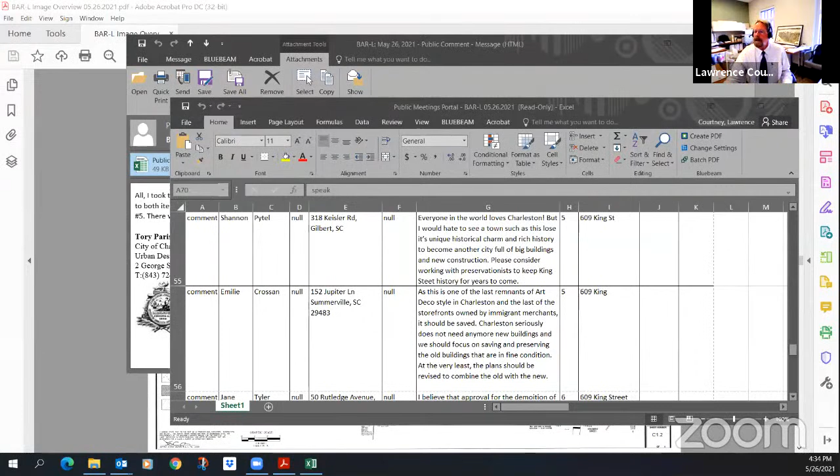Welcome to the May 26, 2021 BAR Large Virtual Meeting. My name is John Robinson. The other board members present, or that will be present this afternoon, are Jay White, Luda Sobchuk, Leon Scott, and James Metters to join us shortly. City staff present today are Tory Parish, Lawrence Courtney, and Linda Bennett.

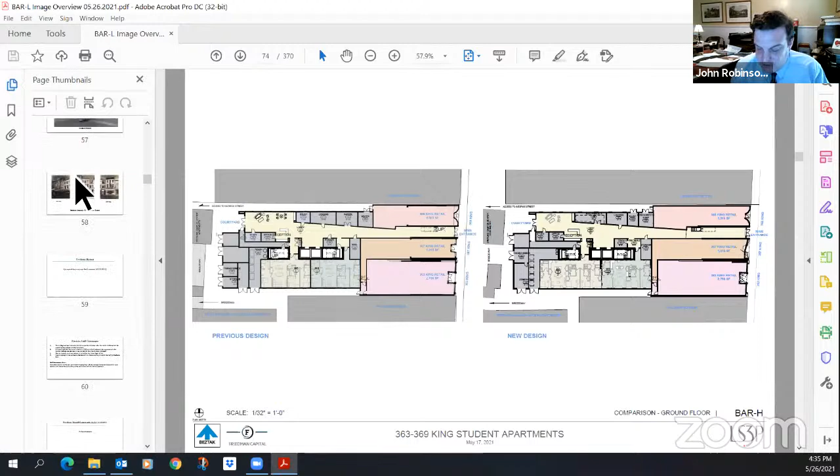The order of the meeting will be as follows. We will have an introduction and overview of the project by city staff to the board and the public. There will then be a period for applicant presentation, a 10-minute time limit as determined by the chair, and any questions of the applicant by the board or staff. Any and all presenters should clearly state their name for the record. Persons affiliated with the project, be they owners, developers, designers, consultants, or other affiliated persons, should speak during this portion rather than during public comment.

There will then be a period of public comment. Public comment is a 10-minute time limit or its equivalent to the applicant presentation as determined by the chair. The applicant does not respond to comments made during public comment. Please, if you are a member of the public, please clearly state your name for the record.

There will then follow a period of city staff comments and recommendations. This is in turn followed by applicant responses or clarifications to the public comment and city staff comments and recommendations. The 5-minute rule applies to this portion as well. The applicant will then take a seat and will speak only if called upon by board or staff.

This is followed finally by the board discussion and vote. The applicant presentation and the public comment are at this point closed. The applicant may clarify inaccurate information when recognized by the chair by raising their hand and waiting to be called upon. Otherwise, they may only speak if they are asked a question by a board member.

There are no items this evening that have been withdrawn or deferred, which means we have 6 agenda items for this busy evening. This is a reminder to the public, if you are able, please turn off all cell phones and other devices. Please also be advised that the BAR's purview and jurisdiction is limited. Please therefore limit your comments to architecture only. Comments related to zoning, such as parking, traffic, block coverage, and livability concerns are not the purview of this board and cannot be voiced here.

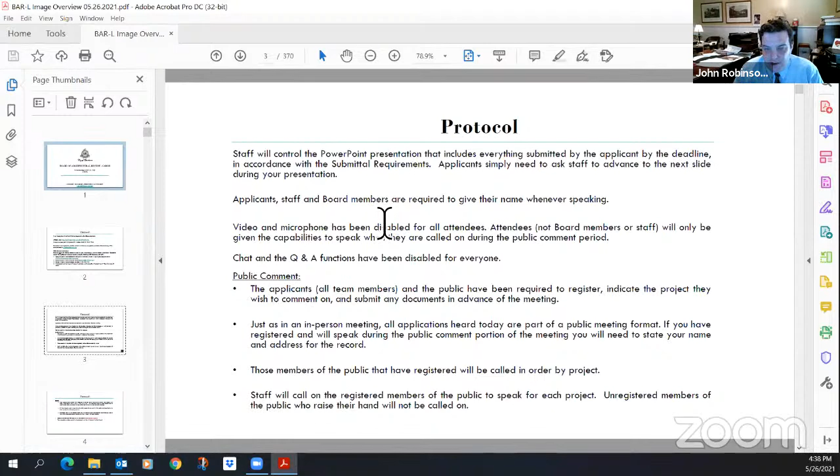Just as in an in-person meeting, all applications heard today are part of the public meeting format. If you have registered to speak, you will be allowed to speak during the public comment portion of the meeting, and you will need to state your name and address for the record. Those members of the public that have registered will be called in order by project. Staff will call on the registered members of the public to speak for each project. If you're not a registered member, you will not be called upon.

Additional protocol. Board members will be polled by the chairperson for comments and for their vote on a motion. Each member when voting should respond yea in favor or nay not in favor. The chair shall reread the motion verbatim, and the board member making the motion should correct the chair if he has not reread the motion accurately.

If a board member needs to be recused, he or she will temporarily be removed from the meeting and placed back in the meeting at the start of the next agenda item. If the board needs to go into executive session, they will call in on a separate conference line, and all video and audio on Zoom will be temporarily turned off until they are ready to return to the regular meeting.

Results and staff comments will be posted on the city website, which is www.charleston-sc.gov/BAR. These proceedings are being recorded and broadcasted to the City of Charleston's YouTube channel.

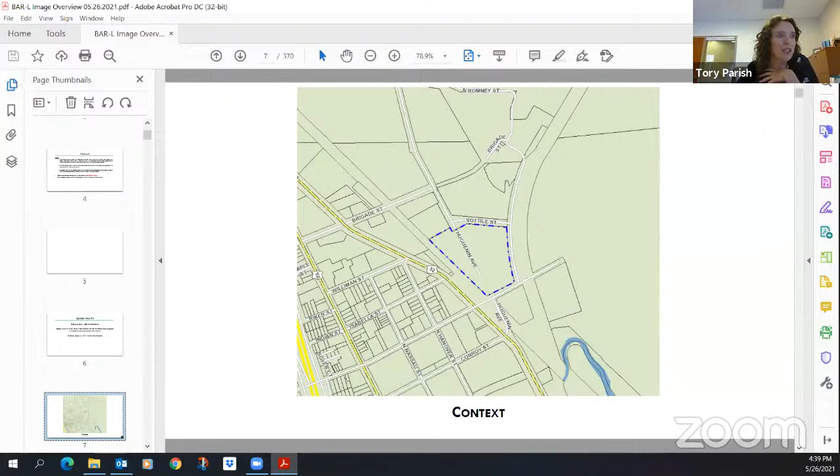Before you is a context slide showing lot parcels and streets. This is Highway 52, which is Morrison Drive on the west side. Huguenin Avenue bisects the property there, and Romney Street is at the south. Here we go with some aerial views of the same location.

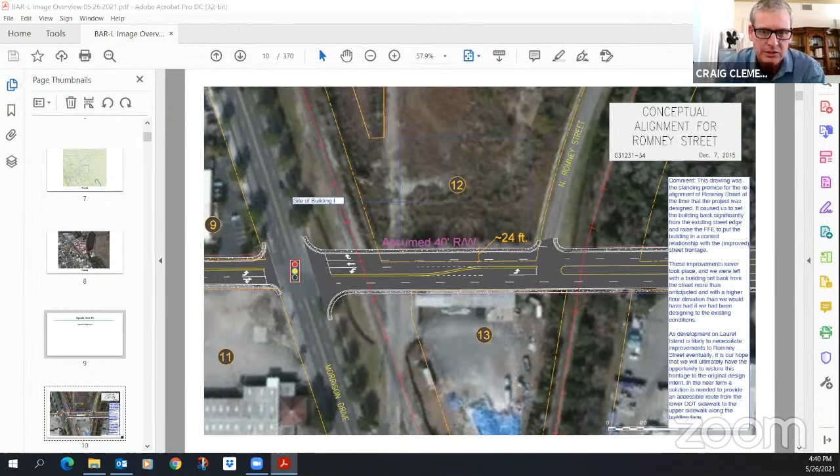It's a good place to start right here. This is a project that's been before the board a number of times, and it's getting to the end—we're just cleaning up a few details. But I thought it necessary to give you a bit of history as to why the building was placed as it was. We were designing this project in 2015, and our charrette was held in November of 2015. So that's how long we've been at this.

This is an image of Romney Street at the time. As most of you know, Laurel Island has been on and off for different development proposals over time. Laurel Island is to the right of this image, so this would be a road that accesses Laurel Island. Right now it's a small 2-lane road.

This was the proposed cross-section, or conceptual alignment, presented to us at the beginning of the project. You can see it shows the realigned Romney Street encroaching into what was then our site, now Foundry Point, by 24 feet. With that premise in mind, we of course wanted the building to have a proper urban placement and be up against the back of the sidewalk, but we pushed the building back by that amount in design, anticipating that this street section would be widened and our building would be properly oriented to the street.

We were also hoping that over time the City of Charleston would take this over from DOT and do more of a proper urban street section. This is obviously very much a highway street design, but that was out of our control at the time—we did want the building in the proper relationship with the street. The street was also supposed to be elevated, so this informed both the placement relative to the street in terms of horizontal distance, and also the setting of the finished floor elevations of the project.

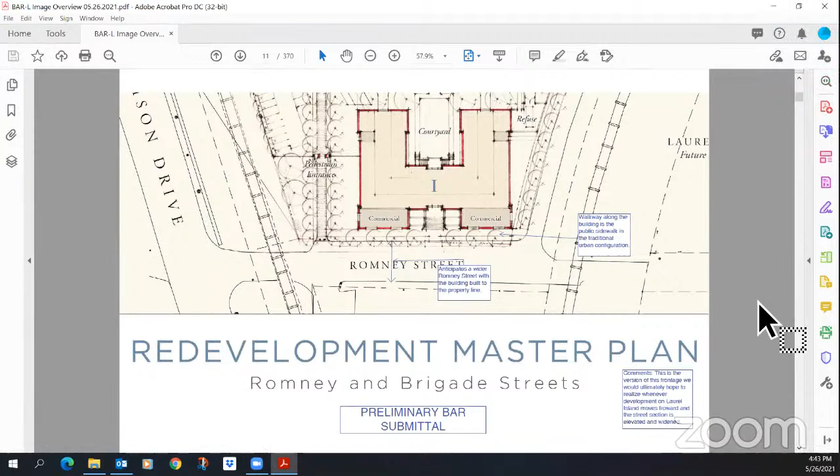Next slide. This was the landscape architect's site plan from the preliminary BAR submittal. Going through the TRC process, we had to reconcile where the curb was at the time. What we ended up with was a rather odd situation where the sidewalk is up against our building and the curb is way down below us—we're further off the street than we'd like to be. But we're hoping that long-term this street section would be improved.

Should also point out that this drawing at this point does not really deal with the elevation change, the fact that the road is lower than the building. Subsequent to this, the DOT required their standard 4-foot concrete ribbon sidewalk down at the curb. That's not shown here, but we are being required to pour that, so we're going to have two sidewalks. The plot thickens, but that was subsequent to this drawing.

But you can see we have a kind of an odd street frontage situation. So, next slide.

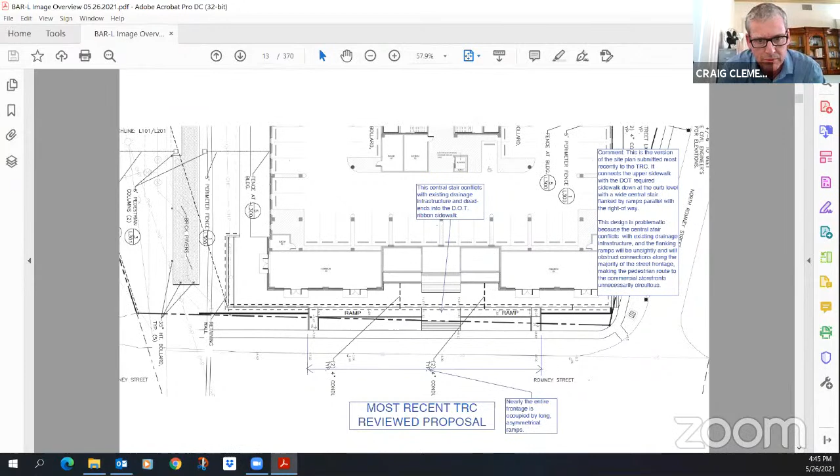So what we proposed — next slide — and again, we still hope this to be an interim situation, with our sidewalk ultimately becoming the sidewalk. In the meantime, as an alternative to what you just saw, we propose a landscape bed in front of the entrance, with two flanking ramps that circle up and hit the walkway along the building, and a landscape bed that absorbs that drainage inlet so it's not terribly visible. We're also adding four stairs along the sidewalk to connect the DOT sidewalk up to the commercial storefronts at the building, creating a more continuously connected frontage, and we don't plow through our drainage inlet.

Again, I don't think I would have designed this from a blank canvas, but we're dealing with a rather odd situation in hopes that development pressure in Laurel Island, which is still very real, will lead to that street section being reevaluated at some point in the fairly near future. But this was our proposed solution in the interim.

I should also say we're proposing street trees and a tree lawn down at the new sidewalk — down at the new curb.

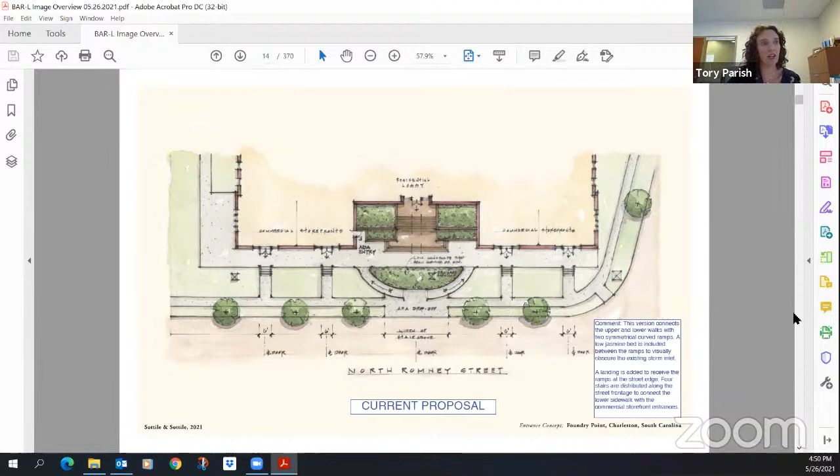And I don't see any reason why that could not be included in this improvement. I'm not sure what the grading situation is there, but I believe that can be accomplished with steps. Well, that would be ideal. And I think that all of that concrete has already been poured, so that would be an ideal situation. The concrete on the walkway has been poured, but I don't think the sidewalk has been poured - I could be wrong, I'm in Savannah.

Okay, well, maybe it is a discussion point for the board then. Okay, very good, thank you Mr. Clements and Ms. Parish, thank you for the clarification. Sure thing. At this time we will have board discussion and potentially a vote. What do my fellow board members have to say about the Romney Street project?

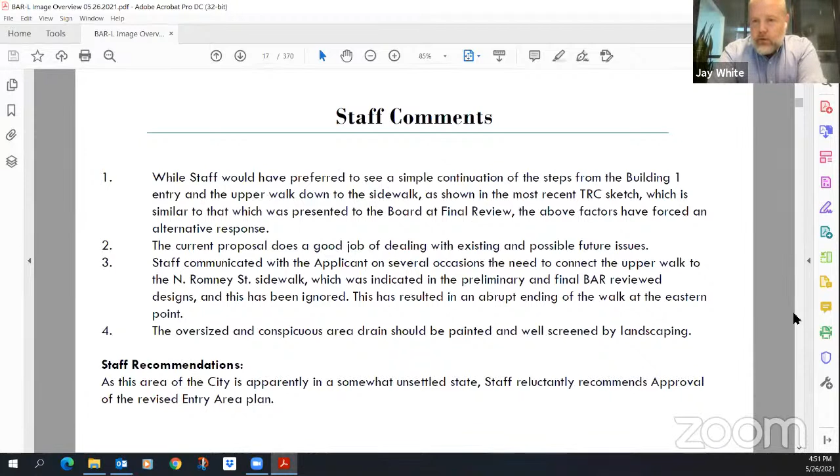Well, I'll kick it off, Ed, by first observing that I'm not exactly sure Mr. Clements was involved in how we got here, but it seems like this is not the first time he's been involved in the proposed solution to the best of it. So I think what's proposed is more than adequate, I think it's completely fine. And with the connection of the eastern walk, like y'all were just discussing, it will always look a little weird so long as there are two sidewalks there, but hopefully that will rectify itself in the coming years. So I agree with staff's recommendation.

Thank you, Mr. White. Any other board members care to comment on 20 Romney? Mr. Chairman, this is James, I agree with Jay's comments and staff's comments. Okay, this is Leon, yes sir, Leon Scott, I am as well, I'm in agreement with staff and board comments so far. All right, anything from Luda?

Yes, I have a question. Can we go back to that solution sketch quickly? How will the transition be handled between the street sidewalk and that slope up to the building sidewalk, with the steps and all that? Is there a retaining wall, or is it a berm, or what is it? Do you have an elevation of the building with that part of the landscape and hardscape, by any chance?

Yep, yes. Hold on just a second, and we'll let Mr. Clements respond if he has an answer on this. Sure. Right now, that lawn between the upper sidewalk and the lower sidewalk slopes down at a fairly good clip. So by the time you get up to the walkway, the drop along that edge is anywhere from 6 inches to a foot, but it's not a significant drop off. So no, there is not a retaining wall right now, that's just an edge to that sidewalk. Okay.

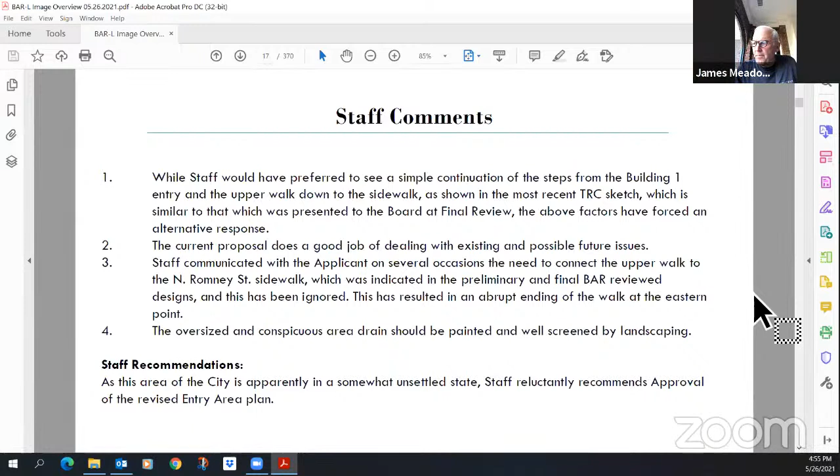Ms. Sobchuk, how do you vote? Yay, in favor. Mr. Scott, how do you vote? Yay, in favor. Mr. Meadows? Yay, in favor. Mr. White? Yay, in favor. Myself, yay in favor. Passes unanimously.

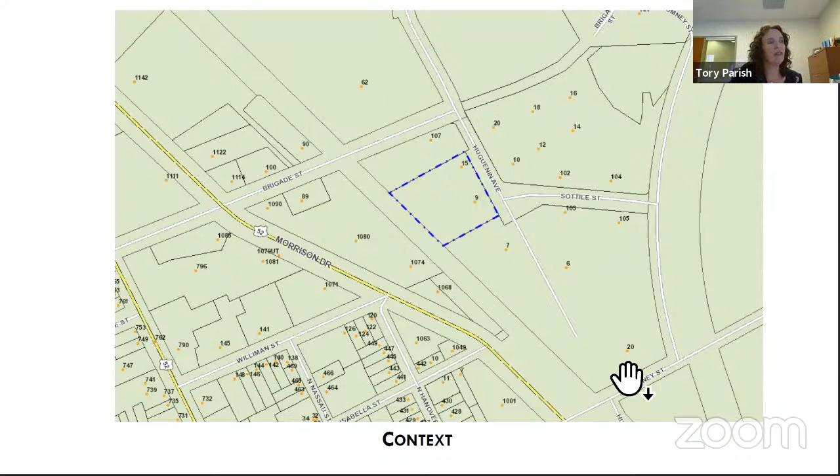Okay, and we'll have the applicant present. Who do we have here this evening for the applicant? This is J.R. Kramer, the Remark landscape architect for the project. Good, Mr. Kramer, you have the floor.

All right, great. So I think this may be the last item for the project to get approved by the BAR, and we've been working hard. Unfortunately, we could not find the original stamped BAR drawings; the builder, the general contractor, no longer had them. So what happened, this image indicates, highlighted, is the existing fencing that has been built on site. It's a decorative steel fencing. I know originally it was noted that the fencing should not have any fasteners. The fence we specified, which was a steel fence, we did not think had fasteners.

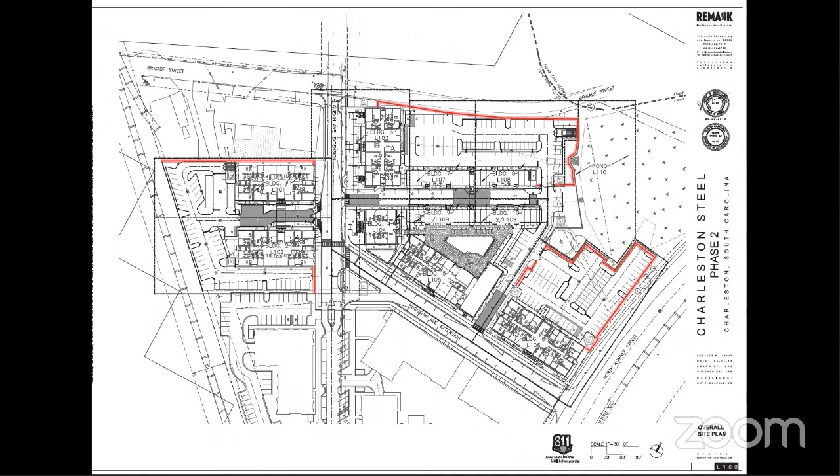It's an unfortunate incident that this got installed. This was not the intent of the original design of the fence. We were made aware afterwards, after everything was already installed. So what we're asking for is to allow this fence to remain, and just ask for forgiveness. We're really sorry this happened. This was not the intent.

Does that conclude your remarks, Mr. Kramer, at least for now? I think so. I think the owner may be on, I'm not sure if you have anything. Sure, for Oliver. Yeah, this is Mike Oliver.

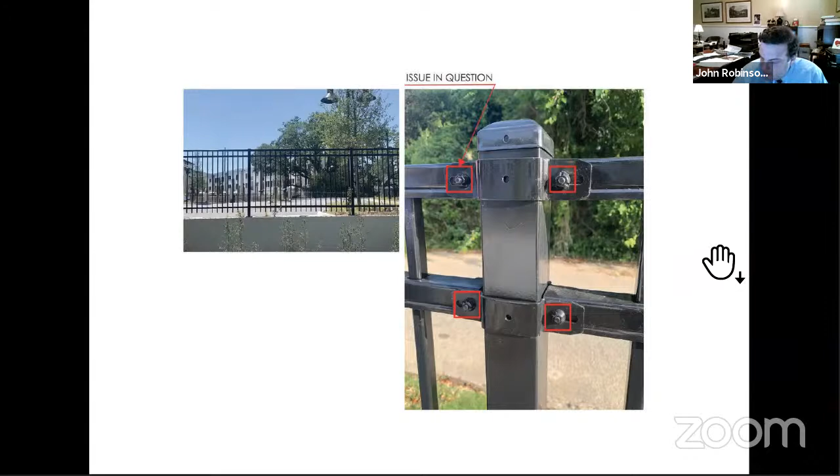City staff comments and recommendations. Staff observations: Number 1, in numerous documents, comments, notes, and various communications, staff has conveyed the theme of eliminating exposed fasteners and metalwork generally, and in fencing specifically. 2, drawings of this fencing showing these exposed fasteners were never reviewed nor approved by the board or staff. Requests to applicant to produce documentation to the contrary have been unfulfilled. 3, fencing with these exposed fasteners was not shown on the mock-up drawings, nor were the connections displayed or approved on the mock-up. And 4, the subcontractor for the fencing has fabricated and installed fencing at other locations with this requirement, such as Buist Academy, and should be aware of, or at least have inquired of, the board's and staff's expectations for welded connections and the elimination of exposed fasteners.

Staff comments: 1, the bolted connections are already failing, slipping down the posts in places, and are simply inferior connections. 2, the bolted connections, if made more secure, are not terribly unsightly, but staff is unconvinced that this may be successfully accomplished as currently installed. 3, staff notes a hole in the back of the connector at the post, which may have been designed to attach the connector to the post. While this would solve the problem of the connector slipping down, we would still have the exposed fasteners. 4, staff acknowledges that the powder-coated finish on the panels is superior to the traditionally painted finish that would have to occur at welded connections. 5, thoroughly clean and touch up the fencing components regardless of which direction the board chooses as a remedy. And 6, while the fencing is somewhat screened from view at this time, as the Laurel Island PUD evolves, the fencing will be very visible.

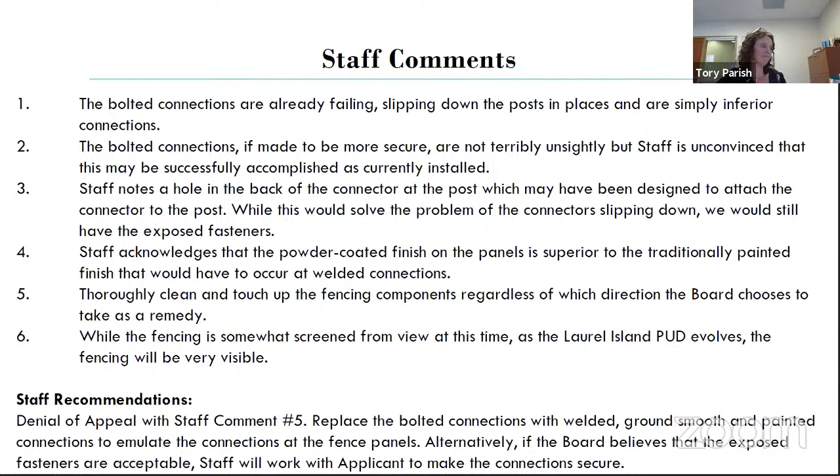Yeah, this is J.R. Kramer. We did talk with the installer about whether it's possible to have a welded connection, and he said it was not possible.

Okay, thank you, sir. This is Mike Oliver. To speak to that as well, we would have to remove all of the fencing on the project and replace it with a fence that we can work through and get approved, and we're asking to not have to do that. I do disagree that the fence is failing in locations. We can certainly review that and correct any of those items if this exemption is approved.

Okay, thank you, sir. We will now move on to board discussion and voting, a potential vote. What do my fellow board members have to say about agenda item number 2?

Mr. Chairman, I'll start on this one. Yes, sir. This is James. Yes, sir. If I read through the staff's observations and the staff's comments, and listen to Tory talk about the efforts to get the correct fence installed, it was simply not installed.

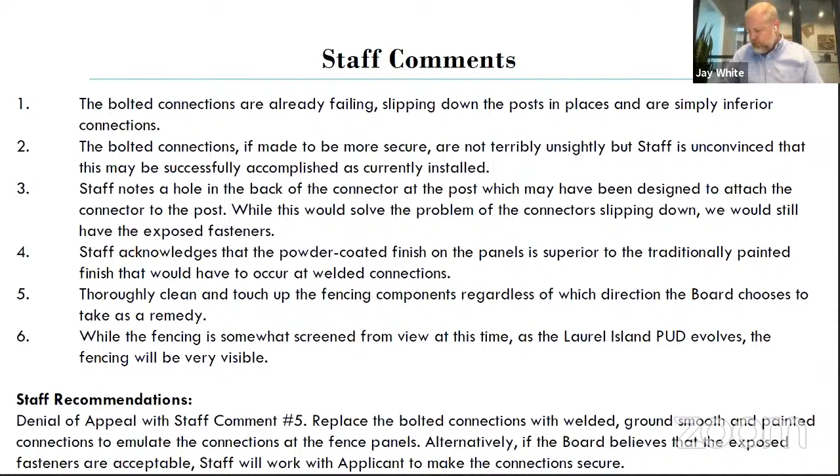Further board commentary? I'll introduce a motion if everyone's ready. That'll be fine, Mr. White. Okay, I'll make a motion for denial of the appeal with staff comment number 5 and with board comments. Mr. White, I understand your motion to be for denial of the appeal with staff comment number 5, is that correct? That's right, and board comments. Do I have a second?

I will second. This is Leon Scott. I'm going to rule Mr. Scott as having gotten that second in before Mr. Metters. Very good. We have a motion by Mr. White, a second for denial of the appeal with staff comment number 5 and comments generally.

Mrs. Sobchak, how do you vote on this motion? Yay in favor. Mr. Scott? Yay in favor. Mr. Metters? Yay in favor. Mr. White? Yay in favor. And myself would be yay in favor.

I do want to say to Mr. Oliver and Mr. Kramer that I'm sorry for this outcome, and I have no doubt that this was not your responsibility. But we have to be very careful about the exceptions we make with finishes. I would just like to say it's a very unfortunate situation all around.

John, am I allowed to ask a quick question? Yes, sir. I know this was already voted on, but is it possible to only do it at the areas that are along the public right of way and not internal to the property? I would have to defer to staff to educate me on those parameters as they understand them, so I will defer that question to either Mr. Courtney or Mrs. Parish, whoever's best able to answer. Well, Mr. Chairman, do we want to do that during this meeting, or...

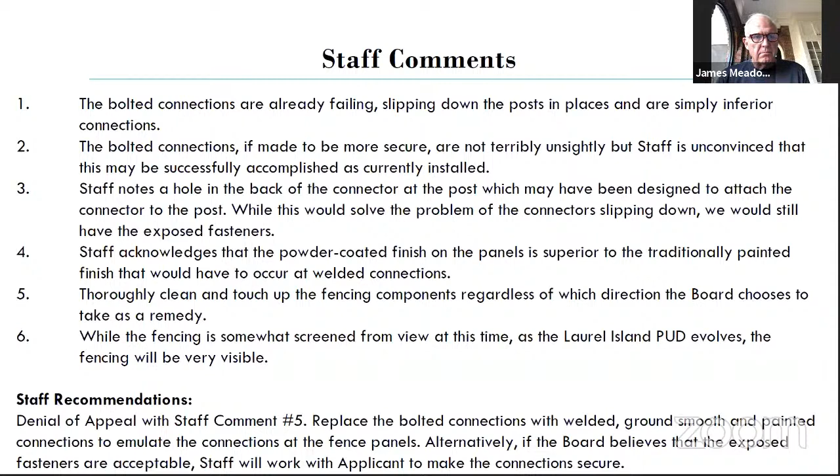Well, that's a good point because they've already taken the vote. I think we can get back with that, and if it has to come back up in terms of the scope of this, it can be on a future agenda. I will plan to reach out to Lawrence and staff tomorrow. Great, thank you, and to the extent that something can be done to accommodate Mr. Oliver, we'll work on that and speak with them in that regard. Thank you. Thank you. All right.

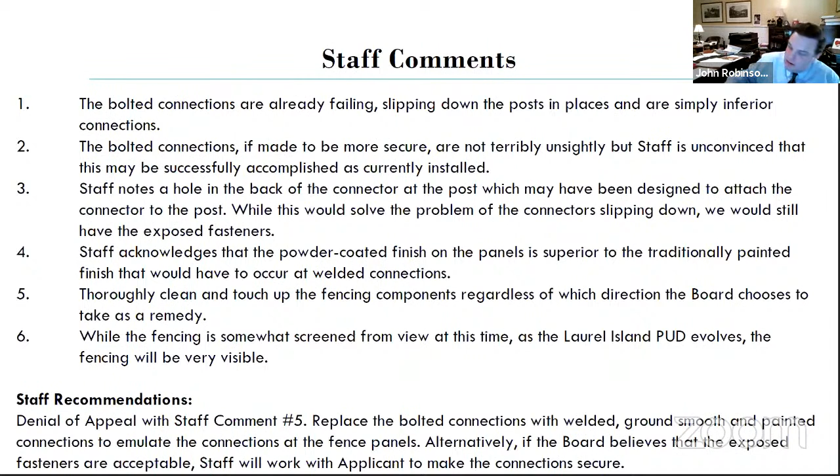Agenda item number 3, 838 Morrison Drive. This is the request for approval of the mock-up panel. This is in the Historic Corridor District. It's not rated.

We'll have the applicant present. Who do we have here tonight on behalf of the applicant?

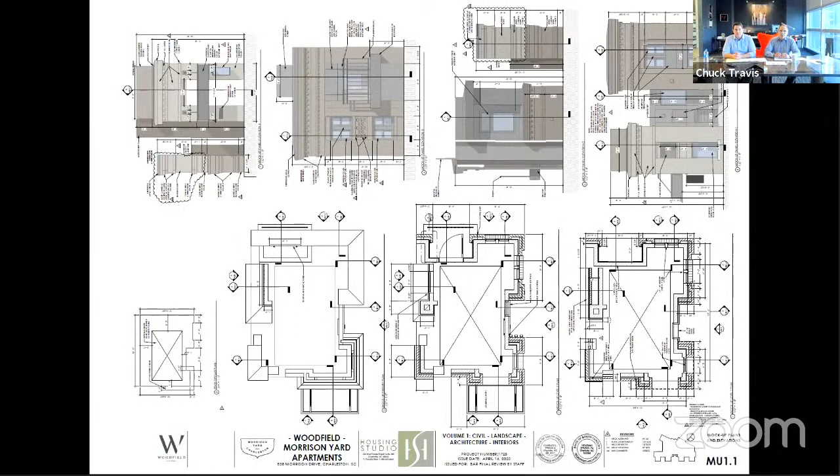Since it's been so long, perhaps Lawrence, you could go to the elevations. I'll give you a very brief reminder of what the building is composed of from a design standpoint. The elevation in the center is along Morrison Drive. It's composed of a tall one-story retail along Morrison that's shielding 2 levels of parking behind it. The upper elevation is the view from the bridge ramp or from the river, showing that tall 2-story ground level parking shielded behind. On the left-hand side of the center elevation is an 8-story high-rise sitting on top of the podium itself, and on the right-hand side is a 5-story mid-rise, comprising essentially 380 units total.

Of those units, we're going to have 5 to 10% affordable housing units instead of just paying into a fund. Our developer and owner of the building made the commitment that he wanted affordable housing to be an integral part of this project, so we're very proud of that.

As we progressed, we had the very good opportunity of meeting Tori. Tory, it's nice to have you on board, and Lawrence on site April 21st to go through a very early stage of our mock-up panel to talk primarily about brick and windows.

At that point we were able to talk about the brick selections we've made that we feel very strongly about, and some adjustments to details that we've gone back and reconsidered. The panel you saw on site yesterday is exactly what these drawings represent, and what's been built on site is what we're proposing to move forward with.

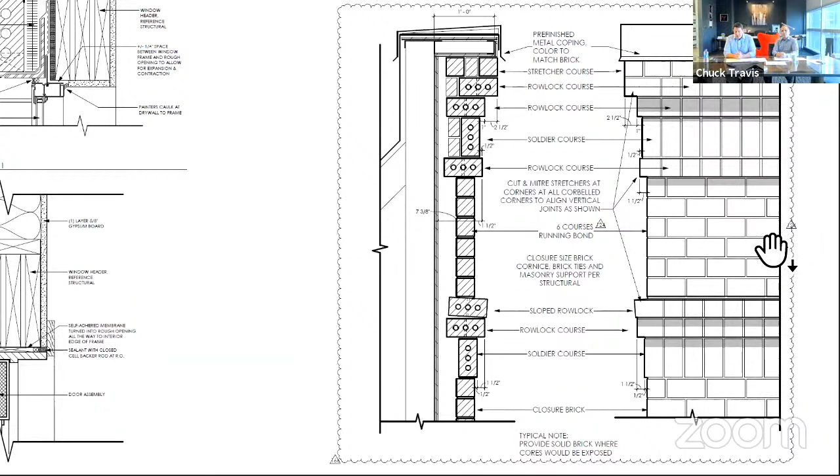With regard to using the closure size brick at the top of the building — when selecting materials, we wanted to use the larger brick size at the base to help ground the building, and we think it worked out really well. During our design phase, looking at precedent imagery, we found it was pretty common for buildings using this tripartite division to use the same material at the capital as at the base. We felt that worked well, because having those larger brick sizes at the top helps pedestrians and occupants at street level perceive the texture, relief, and shadow lines of that brick detailing all the way up at the top of the building. For that reason, we elected to use that size brick at the top.

So with that, Mr. Chairman, we'll turn it back over. Thank you both for your time.

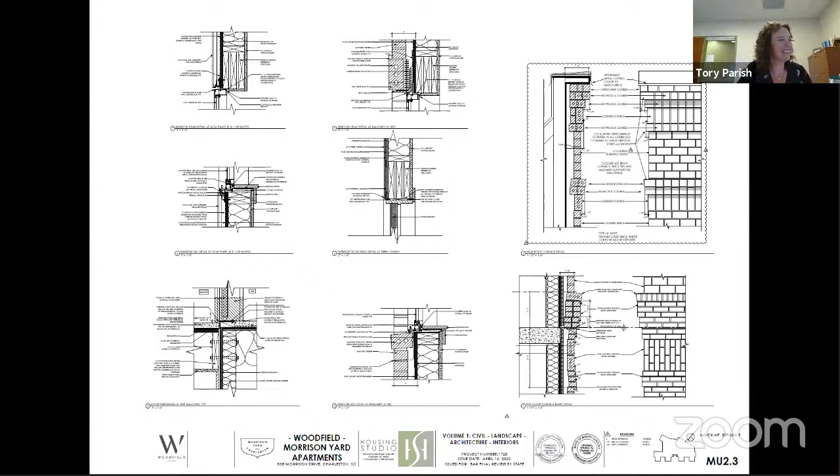All right. Staff observations. We'll begin with number one.

The closure brick was explicitly denied in staff comments at the board final review, which were made part of the approval motion. After subsequent vigorous lobbying by the applicant to allow a representative sample of the closure brick on the mock-up for board comparison, staff acquiesced and agreed for the applicant to show this representative sample in a limited fashion. It was understood by staff at the time that if allowed, the closure brick would be used only at the lower portion of the building to help establish a clear base for the structure.

Applicant has used an excessive amount of the closure brick on the mock-up, showing it more extensively than as a simple representative portion, and is now showing it at what will be the higher parts of the building on top of modular brick, violating the basic board principle of material tectonics. Last, while staff agrees that the use of closure brick can be appropriate, alternatives to what is currently shown, its location and detailing need to be further studied.

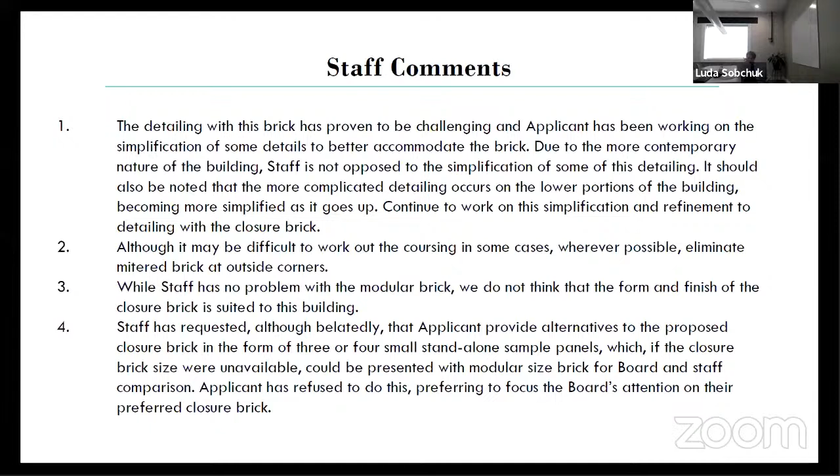Staff comments: the detailing with this brick has proven to be challenging, and the applicant has been working on the simplification of some details to better accommodate the brick. Due to the more contemporary nature of the building, staff is not opposed to the simplification of some of this detailing. It should also be noted that the more complicated detailing occurs on the lower portions of the building, becoming simplified as it goes up.

Continue to work on the simplification and refinement of the detailing with the closure brick. Two, although it may be difficult to work out the coursing in some cases, wherever possible, eliminate mitered brick at outside corners. Three, while staff has no problem with the modular brick, we do not think that the form and finish of the closure brick is suited to this building.

Four, staff has requested, although belatedly, that applicant provide alternatives to the proposed closure brick in the form of three or four small standalone sample panels, which, if the closure brick size were unavailable, could be presented with modular size brick for board and staff comparison. Applicant has refused to do this, preferring to focus the board's attention on their preferred closure brick.

Five, while sealant colors are generally acceptable, continue to fine-tune these while moving forward. Six, eliminate the kicked out drip edge at the bottom edge of copings in lieu of a vertical hemmed edge spaced just far enough out from the face of brick to establish a drip nosing. This should be relatively tight with no building wrap being exposed as is currently shown.

Seven, due to its low elevation, flood panel anchorage isn't ideal, but recess the plates into the brick as shown and paint them the generalized brick mortar blended color. And eight, it is noted that applicant has proposed that lipped brick at loose lintels will be carried up through the second floor and then returned to a regular brick over lintel condition due to lessened visibility and the fact that these are almost always in shadow. Staff agrees with this approach as long as the lintels are painted the generalized brick mortar blended color of the wall above.

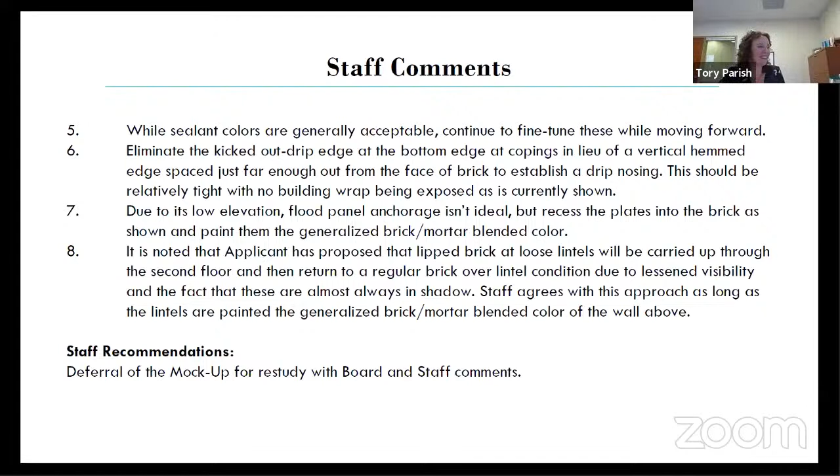Let's move on to any applicant response or clarification as to city staff comments or recommendations. Mr. Travis or Mr. Karanakis?

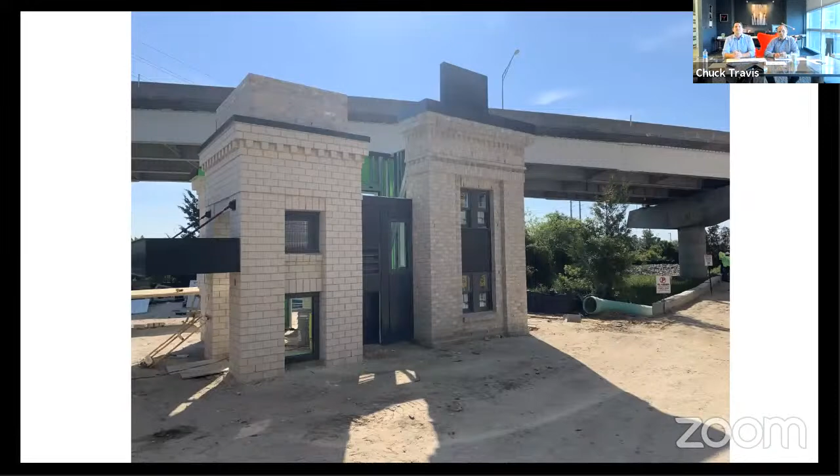Mr. Chairman, thank you. As you know, particularly if you're an architect on the board, how difficult it is now to be able to secure and procure building materials. What we are hoping for today is that there would be some level of approval by the board. As you know, windows are extremely hard to get through the process, have approved, and then get them manufactured and on site. So we would like, if possible, to have those approved.

And then secondly, if we can approve the modular brick that we're using for the shaft of the building on the high rise, which is the majority of the brick that's on the remainder of the building. And if we can come to some understanding if the closures are agreeable to be used on the base of the building, we can certainly continue to work with you on the capital if needed. But obviously, we'd love to have approval of everything. But if we can approve certain pieces of the brick and the windows, that would definitely be helpful with some of our construction scheduling. Thank you.

Okay, thank you, Mr. Travis. Board discussion and votes on 838 Morrison Drive. What do my fellow board members have to say about this mock-up?

Mr. Chairman, I'll start, this is James. I want to apologize to you and the other board members for not being able to be in attendance for the site visit yesterday. However, the project manager on the site was gracious enough to be with me while I visited the site today.

In addition to the obvious things, there's a gap from the top of the window to the lintel above, which I'm not sure how this will be left in its finished state. There's a gap in the mullion, the separation between the two windows, to the surface metal below it, which I'm not sure how is going to be filled. The fact that you can look up and see the holes of those bricks throughout the mock-up was surprising to me.

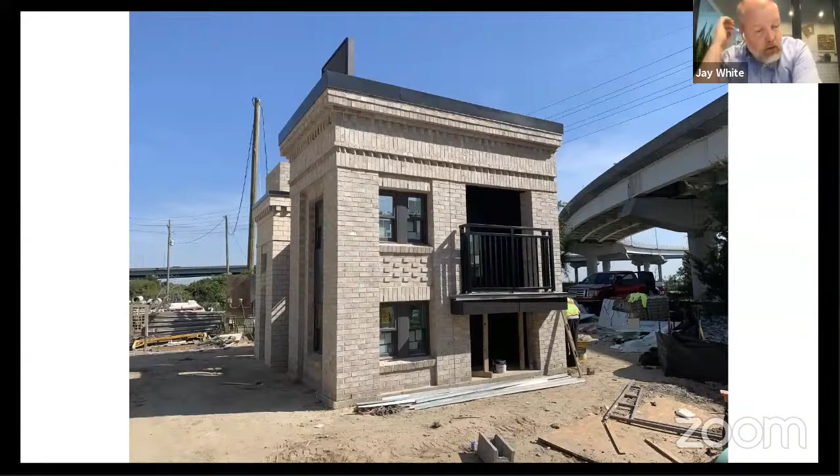Further board comments. I'm in agreement as well, this is Luda, with all the staff comments and recommendations, as well as the notes James made additional to those comments. This is Leon Scott, I'm also in agreement with staff comments as well, and with my fellow board members thus far. Okay, thank you, Mr. Scott.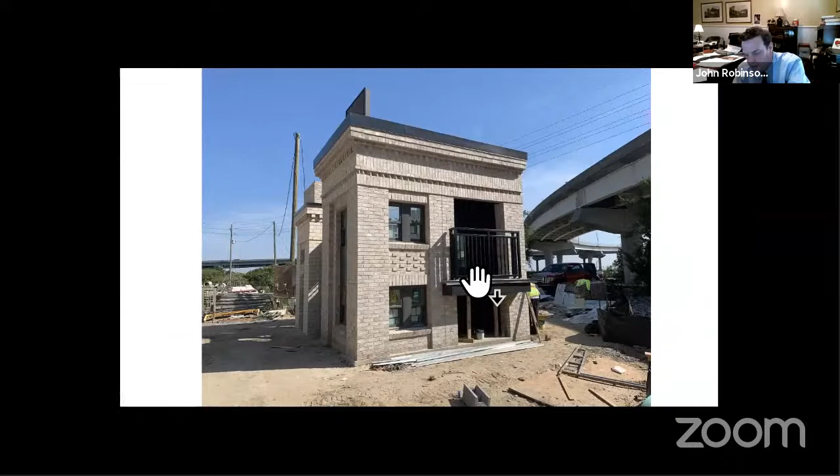I would just add, at the visit, I for one thought that the cornices et cetera were actually rendered quite well. I believe that staff has given some flexibility with materials, given the contemporary nature of this material, but I think their recommendations are sound. So I would join in the staff recommendation for deferral of the mock-up, to address and tighten up these issues and make sure the mock-up we receive is final and complete. But for reasons we've discussed at other meetings, the issue of getting materials delivered is something we deal with and we're seeing all the time. They're studying possible policy revision. It's very hard to do something on a piecemeal basis, especially when a mock-up is effectively the guarantor of what the finished product is going to look like.

So with that being said, do I have further board commentary or a motion? I'll make a motion, Mr. Chairman, that we defer the mock-up with board and staff comments. Thank you, Mr. Metters. Your motion, as I understand it, is for deferral of this mock-up for restudy with board and staff comments, is that correct? Yes, sir. Is there a second to that motion? I'll second that, Mr. White seconds that motion.

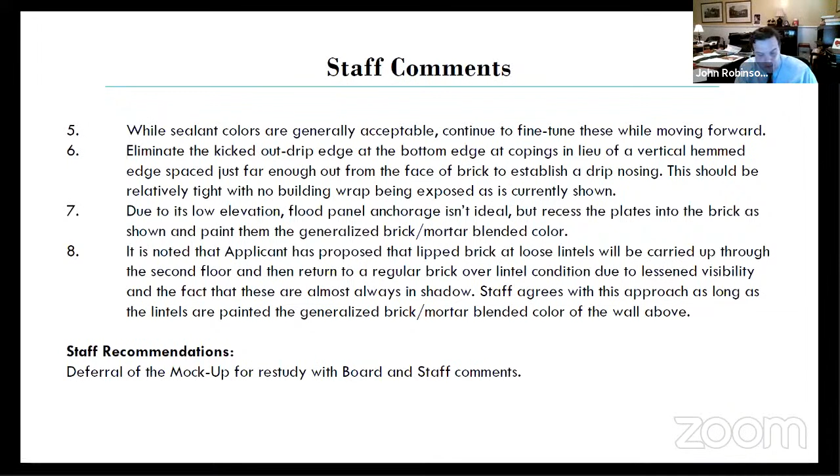I'll now call the roll. Mrs. Sobchuk, how do you vote on this motion? Yay in favor. Mr. Scott? Yay in favor. Mr. Metters? Yay in favor. Mr. White? Yay in favor. And myself, yay in favor. Thank you very much.

Now move on to agenda item number 4, Mrs. Parrish, 363 through 369 King. This is the request for preliminary approval for new construction of a student housing development behind existing historic structures to be rehabilitated. The historic buildings are category 3 and 4, constructed 1891 and pre-1884. These are in the old and historic district.

For context, we've got the red outline there, but you can see Calhoun along the top of the page, King Street on the right side of the project. And then this is looking north on King Street, the buildings are on the west side of the street. The very obvious clay colored, red colored building on the left, and then the next two buildings, including the little hyphen building in between, those are all part of this. This is looking southwest, so the project incorporates the earthbound building here down to the red building, that's the little hyphen in the center.

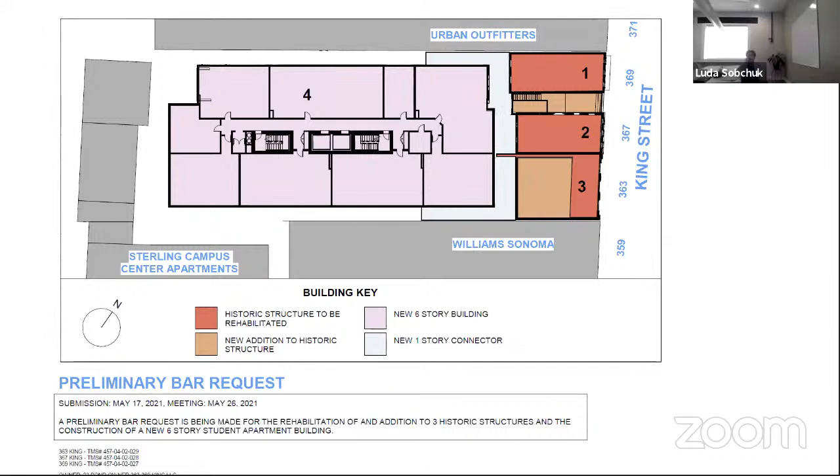Thank you. Who do we have here for the applicant? Mr. Ramos? Yes, can you guys hear me? Yes, sir. I'm here with my colleague, Kira Brower. We turned on the camera in this meeting room and it was upside down, so we're going to go no camera tonight. But I did put on a tie.

So I'm going to talk about the new buildings. I've been focusing on the new structure, and Kira's been the architect focusing on the historic buildings. Because this is a preliminary meeting, we're going to first highlight the changes made since our previous design, which are minimal, and then point out some of the details. There are a lot of details in the package, but in interest of time, we're only going to focus on just a few of them.

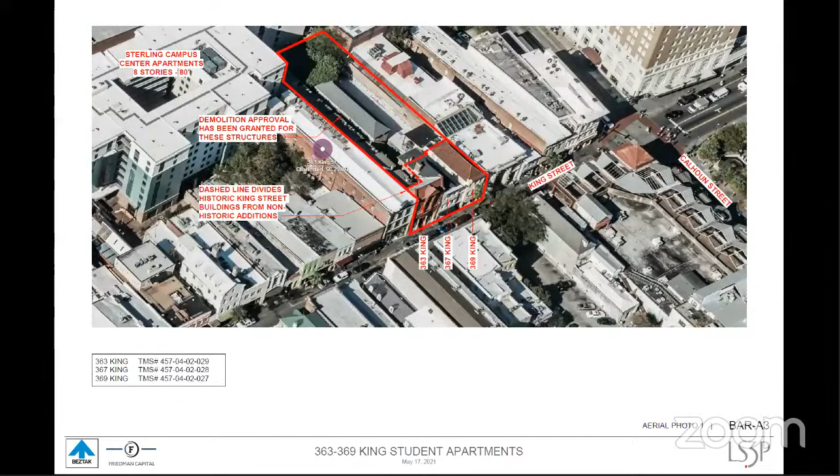If you could scroll down to the next page, please. Next, and one more. We did develop responses to each one of the comments from before. Again, in interest of time, I'm not going to go through those, but we will be talking about them as we look at the drawings. Next, please.

In terms of design revisions from the previous meeting, they are minimal. For the new building, we've tweaked the muntin or mullion pattern for the storefront windows at the very top of the building at the 6th floor. You can see some subtle differences. Also up at the 6th floor, we previously had an outdoor fireplace and chimney, as well as a covered porch, but unfortunately we removed those items from the design. What that does mean is that even less of the building is now visible, since those were items that were visible from before. Other than that, there are just some subtle tweaks to fenestration and details.

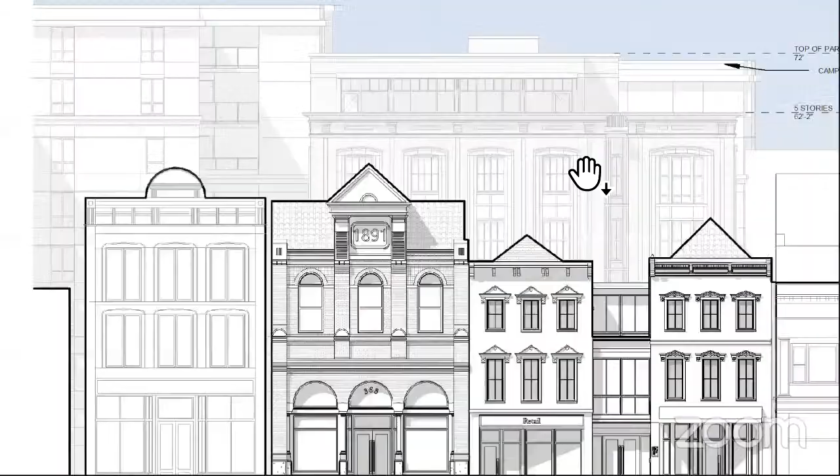Next. This is what that facade looks like if you were to peel away the buildings along King Street. Again, very, very similar to what was presented before.

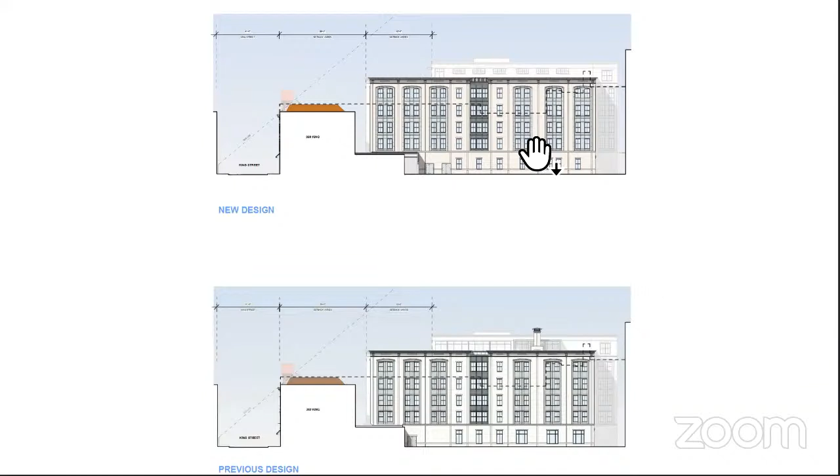Next. This is the north facade. Again, very similar. We did tweak the amount of glass up at level 6. We had floor to ceiling glass on this north facade, but we found that we really needed to use a lot of that space for mechanical. So we effectively eliminated a lot of the roof terrace up at that area and are using high windows instead of floor to ceiling glass. But in terms of what is visible from about Marion Square, it's really a very minimal change. And again, you can see that the chimney is now gone.

Next. This is the south facade, very similar to before. This part of the building is really not visible unless you're on top of a building looking down. Next.

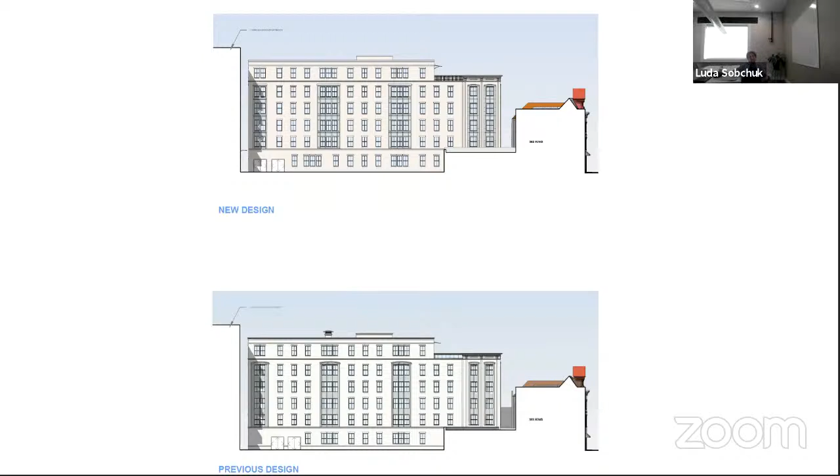This is the west facade, the new design on top, the old design on the bottom. We've done a little more composing of the facade and added some of that paneling detail, though it's not really visible from the public right of way.

We can zip through the floor plans as there are no notable changes, with the exception of level 6. On the old level 6, we had a swimming pool, an outdoor porch on the far left, and a fireplace. Unfortunately, due to cost constraints, we had to eliminate the swimming pool. We now have a mechanical zone on the north side, but there's a tall parapet there, and the mechanical equipment isn't very tall, so we're confident it won't be visible from street level.

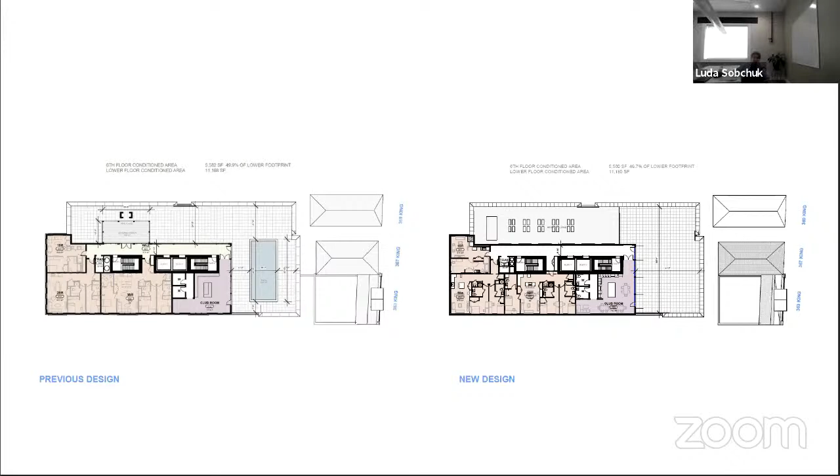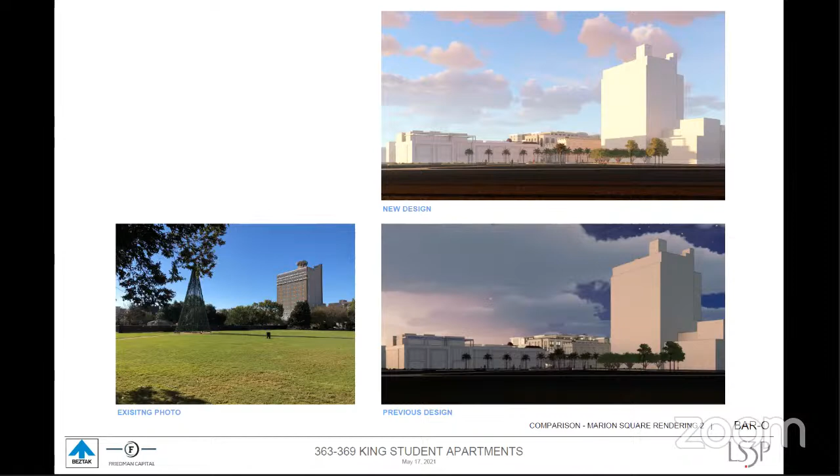There's a little spot on Calhoun Street where the very top of the building will be visible. You can see the new rendering on top and the old rendering below. The main difference is that there's no chimney anymore.

Kira is going to talk about some of the research and revisions regarding the historic King Street buildings. Here's a rendering of the three historic buildings and the new hyphen on King Street.

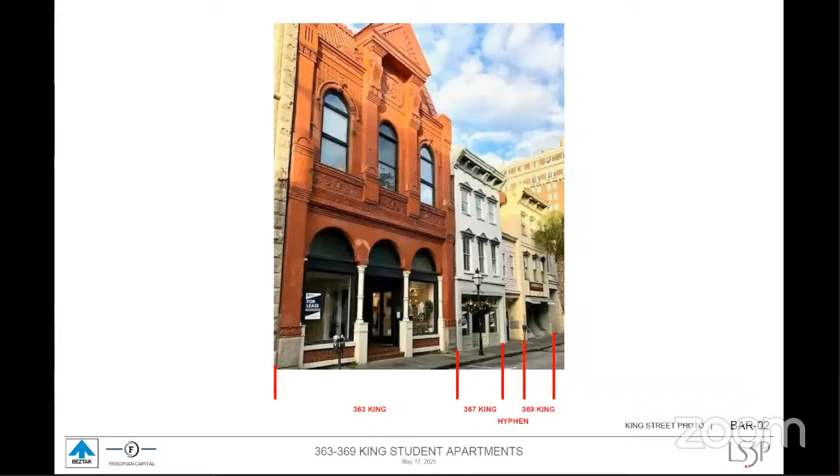You can see an existing photograph looking up King Street from 363. Here's a summary of the more in-depth architectural history of 363 King that we conducted with Brittany Lavelle-Tula of BVL Historic Preservation Research.

We have some more photographs that we were able to uncover. It's still very difficult to determine the materiality and form of the historic building, but there's a little more detail in these photographs than before, and a little more research was conducted. You can see there seems to be a base detail at the columns that isn't currently there, sandwiching some material between the column and the granite piers. We believe it's terracotta, matching the detail on the pilasters on the north and south sides of the storefront — I'll have a detail of that later in the set. You can also see the sill condition and the portions of the columns.

This is a view of the interior where you can see that double height retail space, which we are hoping to bring back.

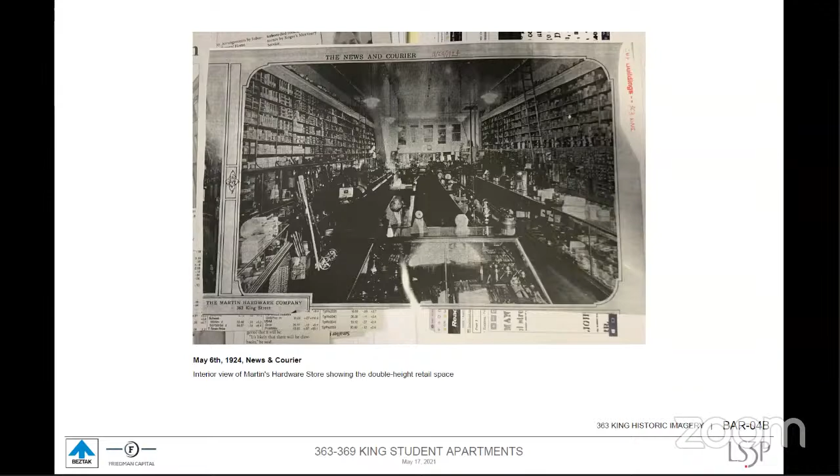Here are some more photographs, from 1924 and 1965. It's still difficult to make out the storefront, but you can see the threshold that was relatively at grade in the left photo.

Here are some more recent photographs, where a large signage band covered most of the building, and a pre-renovation facade with all of the storefront and columns removed, shown on the right from the 1980s.

We have some historic precedents for the style, which is Richardsonian Romanesque. These include 208 King Street and 565 King. They both have rusticated stone at the base and similar detailing in the brick above at 208 King.

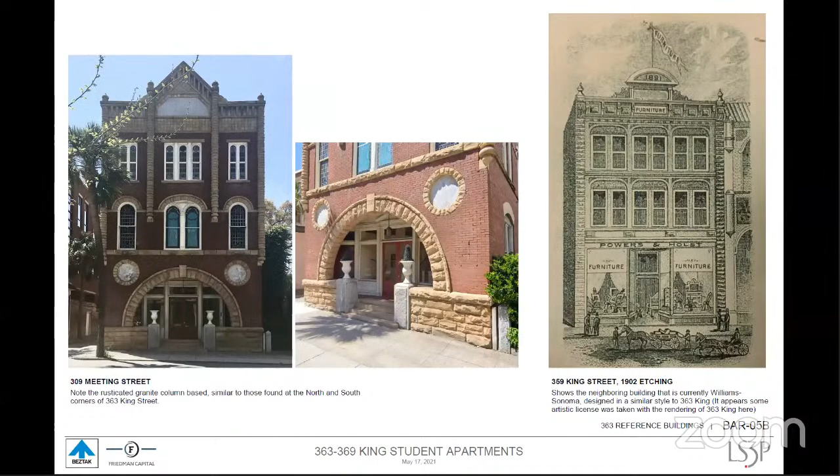309 Meeting Street also incorporates arches and rusticated stone, and the granite piers at this building are very similar to the ones found on 363 King.

You can skip through these, as this is research from our previous submission that we've already discussed. Here's a section through the existing building where you can see the historic and the 1901 construction in the back, which will be removed.

We have some photographs of the other buildings as well, 367 and 369. You can see the existing terrazzo at 367 and the angle that is cut into that, which we are hoping to pronounce in our new storefront. This is 369 and the existing terrazzo here as well, you can see in the image.

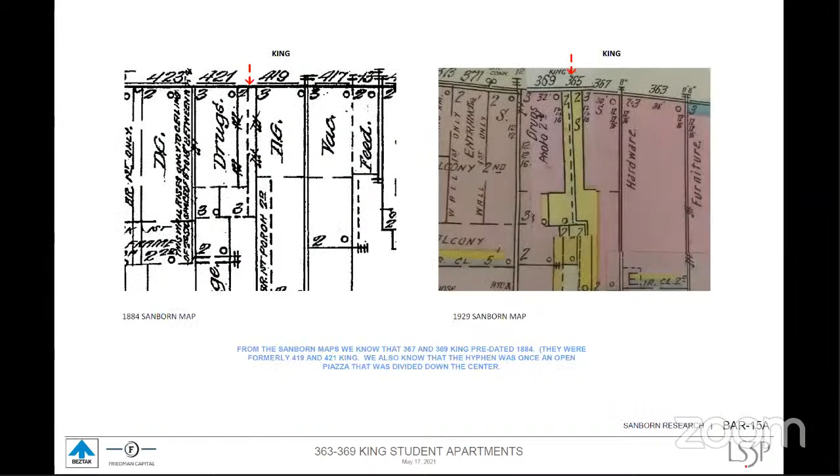And some existing photos, historic photos from 1950 and 1973.

So here you can see a comparison between our original design and the current recommended improvements. The first thing I want to note is the proportion of the columns and bases in the conceptual BAR were kind of chunky and not exactly proportioned to the building correctly. So we've since refined that and made them align to the datums of the existing piers on either side of the storefront, where we have that granite base and terracotta detail.

We have also, in our research, come to the conclusion that the columns at the storefront would likely have been constructed of wood. This is based on the time period this was created - we don't believe cast iron decorative columns would have been introduced to this facade, and this is from our conversations with BVL Preservation Research. It's also related to the proportions of those columns, as they are rather slender and don't seem to be proportions that would be stone or masonry. We've also elected to remove the prism glass from the arched transoms, as this too is not indicative of the 1890s when this building was constructed.

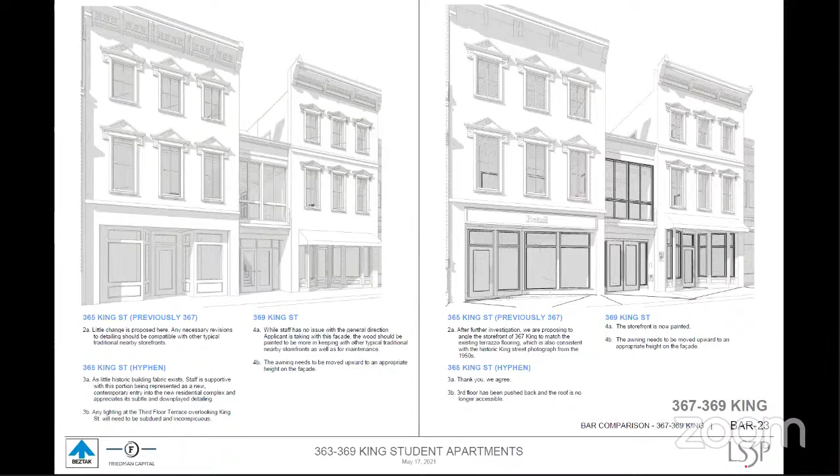Here you can see some comparison renderings, and we have a couple more. This is a nighttime rendering comparing the two - the current is on top and the previous is below. And this is our proposed design for the building.

Now we're going to show just a few details and then we'll wrap up. If you could advance to sheet A203.

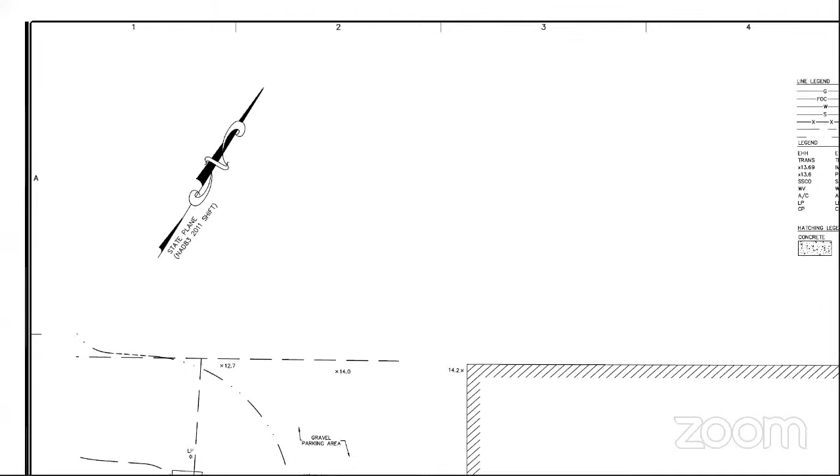This building being in the center of a block, construction logistics has played a big part in material selection. We have a 10-foot wide opening at the back of the site where everything will be coming in and out of, so we are making choices to pick the lightest and smallest materials we can get, which is why we are using things like thin brick on this building.

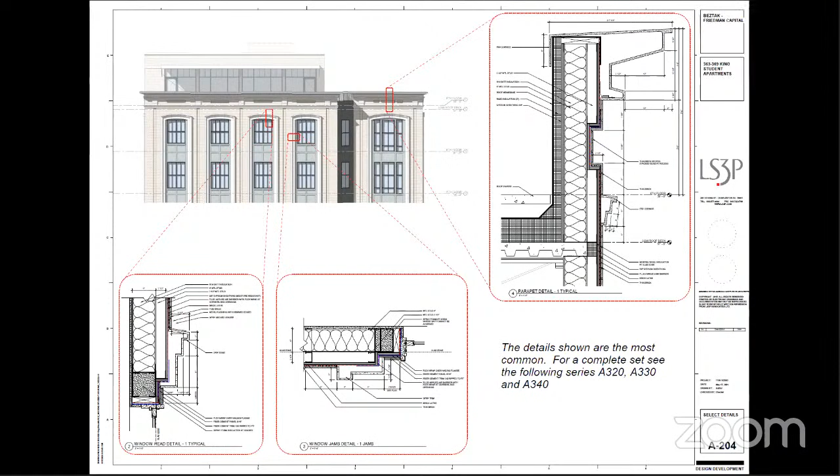Next, we're going to show you just a few of the historic building details. I think if you want to go to A341. It's a little far.

This A341 sheet has the details for the storefront at 363. You can see the image on the lower right-hand corner, the terracotta detailing that's existing and the granite base. This is the basis for those column bases that will be across the facade underneath each of the arch points. So we hope to mimic that terracotta detail there. You can also better see the proportion of the columns and the detailing of the storefront and the larger sill profile. So at this point, we're going to just wrap it up.

We were happy to answer any questions. One of the critiques we got last meeting was to do a deeper dive into the historic research, specifically with 363 King, and we've done that. Even with the additional research and consulting a historic preservation expert, we still had to make a lot of guesses as to how this building was detailed. But I think we're getting a lot closer than where we were before. So with that, we're here to ask for preliminary BAR approval, and we thank you for your time.

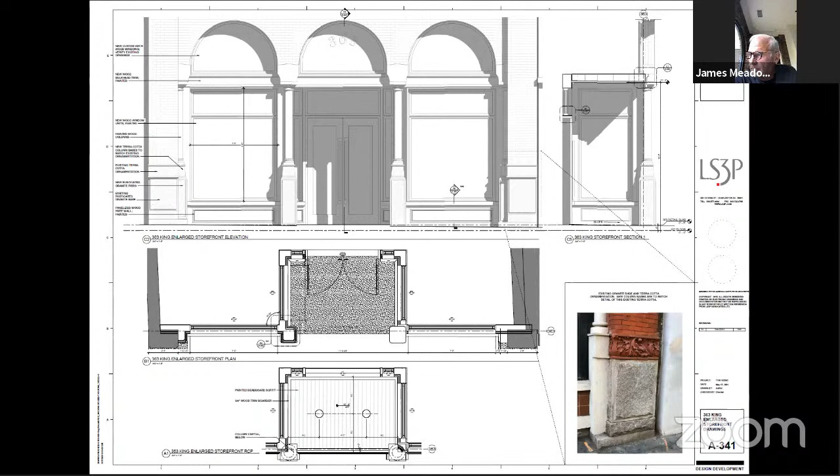So if you go to sheet 351, it has a series of window details. Why don't we zoom in to say the one right in the center, a sill detail, for example. So you can see the thin brick below the window sill here is FRP. It's very likely that these windows are going to be a nailing flange window, so the entire opening will have this flange. But in terms of the flashing, I don't think it's going to be any different. I don't think it's going to pose any challenges that we don't normally have in a brick building.

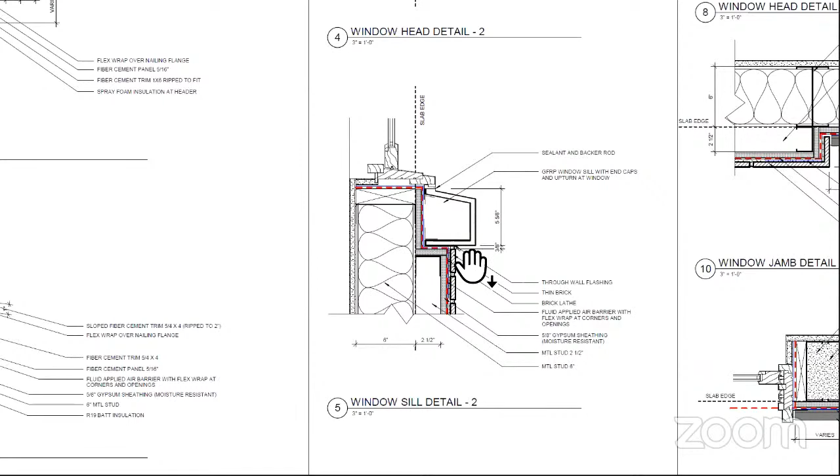In terms of flashing, we will have control joints on this building, just like we would with a typical brick building. So here you can see a through wall flashing joint underneath that sill there. Just like a conventional brick facade, we want that flashing to daylight to get the water out. Thank you. Sure.

Not really out of sequence there. Wanted to see if we had any public comment on this. I believe we have Mr. Schwebler with us. We do. Thank you, Stephen. And Mr. Schwebler is the only one for public comment on this one. Okay, Mr. Schwebler, you have the floor when you're with us.

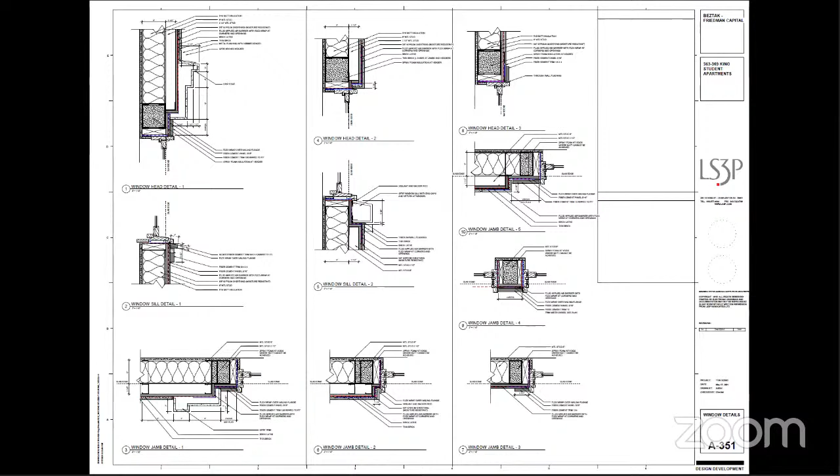Thank you. This is Justin Schwebler with Historic Charleston Foundation. We would first like to thank the applicants for their continued communication regarding the development of this project. The applicants have already been given approval by HCF for the proposed facade restoration of 363 King Street based on the terms of our protective easement. The research and study of the historic storefronts along King Street and the applicant's attempt at recreating those finishes as accurately as possible should be commended. The new student housing building has not changed significantly from the conceptual phase that was approved. We're satisfied with the direction of the project and have no additional comments. We'd like to recommend preliminary approval for the application.

Thank you. Thank you, Mr. Schwebler. City staff comments and recommendations.

Staff observations: though little changed from when the board last saw the project, it continues to be refined for the better. The applicant has incorporated and responded to board and staff comments, and while a few things need further discussion, almost all have been addressed appropriately.

The applicant has provided additional research of the historic structures. Almost all items regarding the historic buildings have been addressed satisfactorily, and the design of the new building has changed little. The color palette has been altered slightly for the better. It appears that exterior materials have changed in some locations, potentially as a result of value engineering. While not all bad, applicants should clearly explain where this has occurred. As is usual, staff reserves the right to compare materials presented to the board at various reviews and to flag any materials that are thought to have been downgraded.

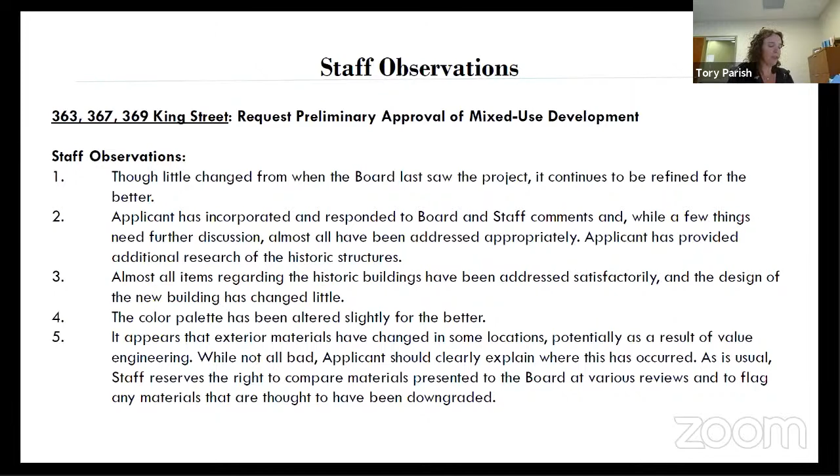Staff comment number one: the introduction of wood columns at the facade of 363 King Street is out of character with the Richardsonian Romanesque style for a building such as this, and with the other primary materials of the facade. Staff assumes these columns would have been of a more substantial and durable nature, such as the stone seen at the cited 565 King Street.

Staff believes these would have been cast iron, based on the referenced historical text description and the size of these members in photos. Additionally, in his book The Buildings of Charleston, Jonathan Poston confirms that the columns were cast iron set on granite bases. There are no details of the columns above the base in this set. Restudy for additional historical evidence of wood columns, or revise the material.

Number two: although difficult to read and inconclusive in historic photographs, the tone of the columns appears to range from dark to neutral gray, as the applicant is indicating in their current scheme. This tone should be maintained.

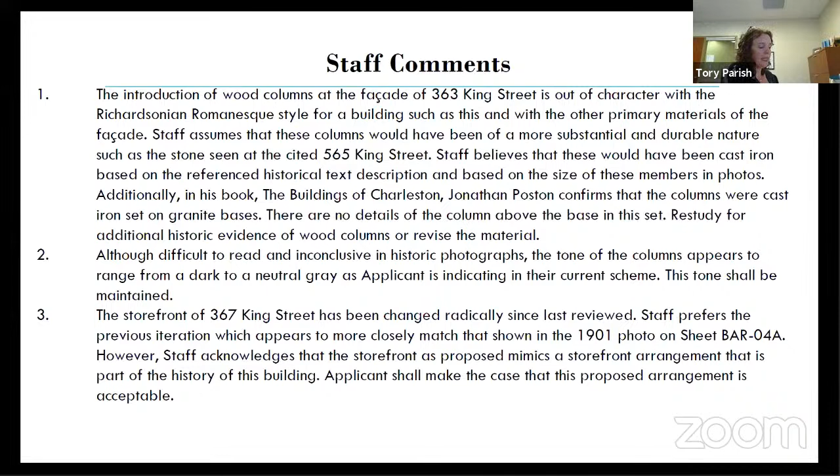Number three: the storefront of 367 King Street has been changed radically since last reviewed. Staff prefers the previous iteration, which appears to more closely match that shown in the 1901 photo on sheet BAR 04A. However, staff acknowledges that the storefront as proposed mimics a storefront arrangement that is part of the history of this building. Applicant shall make the case that this proposed arrangement is acceptable.

Number four: the hyphen on King Street continues to employ a simple, more contemporary language with large glazed openings. As previously noted and acknowledged here, fine-tune the lighting to be as subtle as is practical.

Number five: while approved at conceptual board review, the thin brick at the new building does require some special detailing. One consequence of using the thin brick is that it results in windows being recessed only 2 and 3/4 inches into the wall. These windows need to be more deeply recessed with much longer returns on the thin brick. Restudy the window detailing to provide a larger recess of the window into the wall.

Number six: a material change which should be noted includes the window surrounds, which were previously shown as brick and are now shown as GFRP. Staff finds this to be acceptable.

Number seven: another material change is that of the metal wall panels previously shown on hyphens and spandrels, which have been changed to GFRC panels. Staff prefers a return to metal panels.

Number eight: the windows are called out as composite windows. Submit the proposed windows along with the final brick selections to the board for review as part of the final review.

Number nine: the sill projection shown on detail A3, page A367, seems too large. Decrease the depth of the projection.

Number ten: while GFRP is appropriate in these various applications, the actual material used will need to be thoroughly examined. The staff recommendation is preliminary approval with board and staff comments.

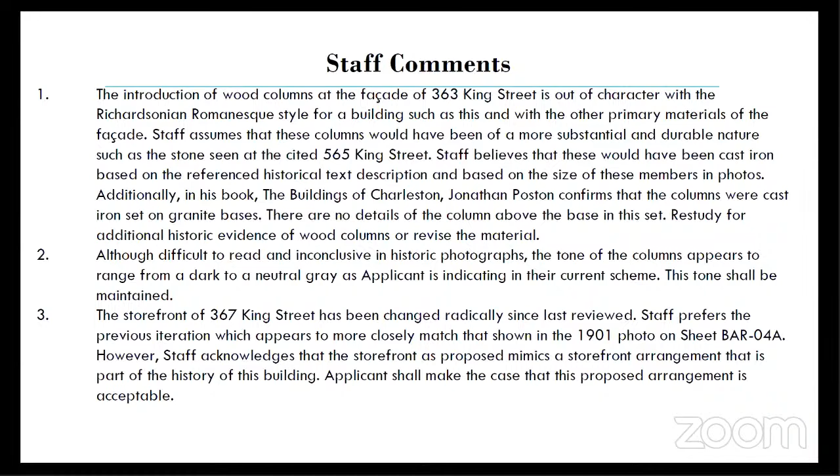So in terms of comment number 5 regarding the thin brick, you hit the nail on the head. It makes detailing and depth much more challenging than a conventional brick.

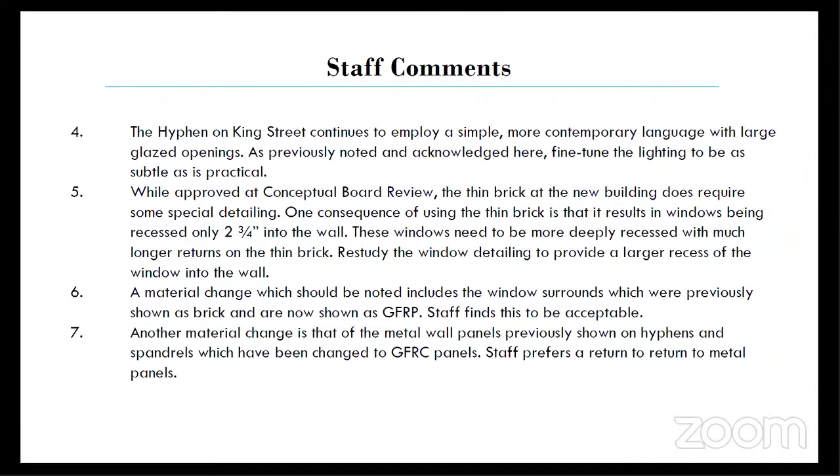We went through about 6 iterations of the details to get depth in them. And so could we even beef up the studs even more, or maybe even recess the windows back into the jamb further? I'm sure we could, but in this particular case with a building that's marginally visible, and when it is visible, it's at great distances. I just ask that we not have to do that for this specific project, because I don't believe it would ever be appreciated even if we did have, say, 6-inch jambs.

We absolutely would continue to fine tune the GFRP and bring samples, especially when we can meet in person. But that's it. Thank you. Thank you both. All right.

We'll now open the floor for board discussion and a potential vote. What do my fellow board members have to say about this agenda item? Well, I'll kick this one off.

I remember the discussion about the columns at 363 back at the conceptual stage. There's a newspaper article, I think, that's quoted as saying that the columns are finely wrought. I think that's where Poston got his notion that this was a cast iron column, like a wrought iron column. But in the language of the day, that just means that it was finely crafted, not necessarily that they were made of iron. So if there's no physical evidence that they were iron, and they're presently wood, and they're in the same basic configuration as the earlier depictions, then the balance of evidence suggests that they were probably always wood. So I'm fine with it, and the fact that HCF, who holds an easement on the property, seems to concur with that approach makes me comfortable with it as well.

The storefront change on 367, I think, is fine. You work with what's there, and we're not necessarily restoring that facade to its original appearance. So I think that's fine. And the balance of staff comments I agree with.

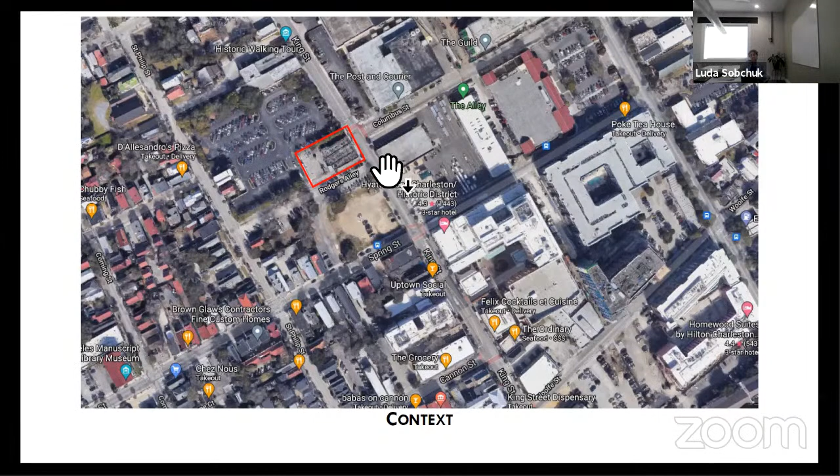The context aerial shown here, the red box indicates the structure that's in question here. The building is on the west side of King Street. You can see King running through the middle of the slide there. The project site is right at the terminus of Columbus Street.

And we will have the applicant present. We have Richard Gow presenting this one. I am not seeing Mr. Gow in the attendees list. Perhaps someone could tell me if there is another name we should allow in. That is funny, I thought I saw him earlier. Let's see who else is on that team. Perhaps Ted Risch. Ted, yeah, there you go. Poor Ted, he's going to have to do it. Thank you, and we apologize for not putting in both of our names.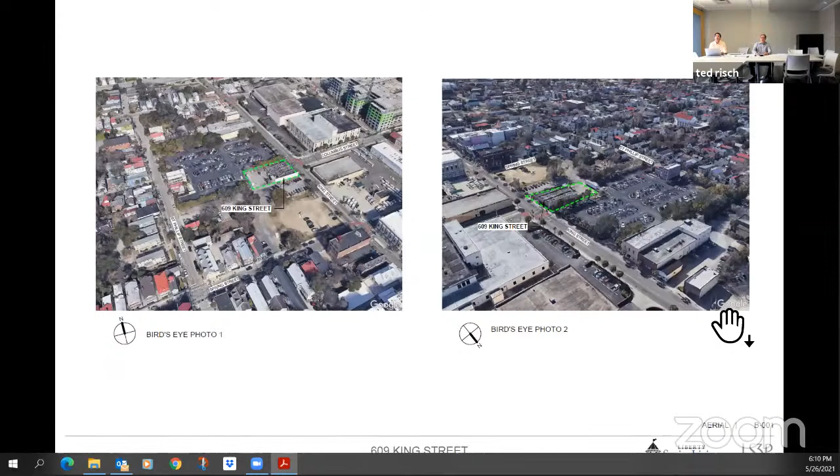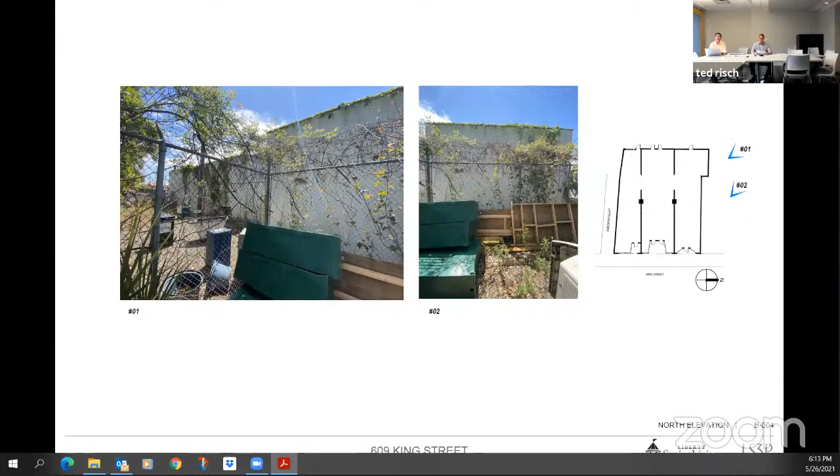Next. The front facade, which arguably is the part that most people gravitate towards on this building. The materials, as we saw yesterday, on the three sides and the back are unremarkable, but the facade has some character. What people have talked about is the in and out of the facade, and the glazing percentage are good. We feel like the building is short for King Street standards, even old King Street standards. And at 9 feet, the soffit height is really very low for a current day or even a good retail building that one might like to see serving neighborhood retail.

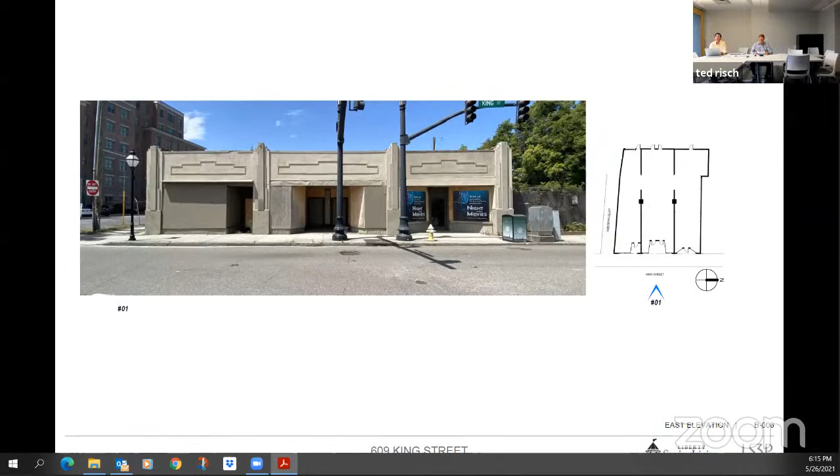Next. And here are some interior images. We've looked at many old buildings together over the years, and we try to find interesting, different types of detailing that would indicate an importance or curiosity or character. It's really hard to find anything here but unreinforced block, simple trusses, wood ceiling framing. The front facade has most of the detailing, if you will, because they needed to create projections out of brick, and you can see that there on the bottom right.

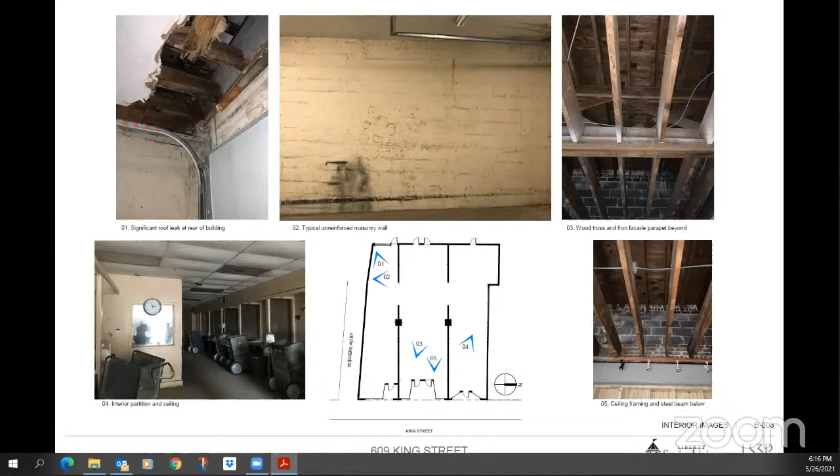Next, please. Obviously, there are a lot of things to consider when undertaking an important task such as the demolition of an old building. You could read all of that, and I'm assuming you have already read it, but I think it would be important to just look at the conclusion, which is in the structural report, which you may have a copy of. On page 11, it says that the extent of repairs and structural strengthening necessary for this building will require extensive modification, partial demolition, and reinforcement of nearly all structural elements. And I would add all non-structural elements as well. Components and cladding is required to meet the code as well, even if it's not structural.

There is substantial risk that the repair work required could result in further damage to the existing building in order to complete the repairs. In addition, there is likely not a reasonable method to address liquefaction or foundation issues. It's probably spread footings, and like a lot of buildings in Charleston, they're subject to liquefaction. As the building stands, it poses a very high probability of failure should it experience a design seismic event.

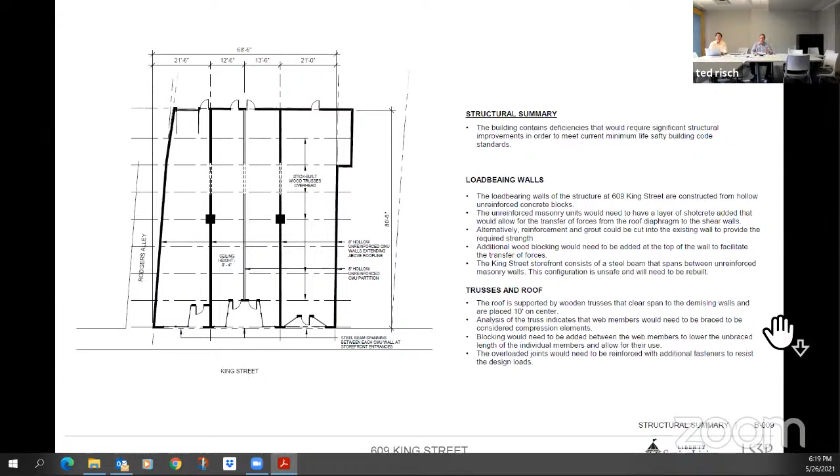In effect, to reuse this building as it is would require us to build onto every surface either a reinforcing steel component, shotcrete, bolts, or gusset plates on trusses. All of the things we have discussed on other buildings would have to occur here as well. In addition, the glazing, the framing, all of the front facade components would need to be restrained laterally, and the elegance of any glass or shape would be somewhat compromised by the heaviness of what we would have to come back with to restrain it.

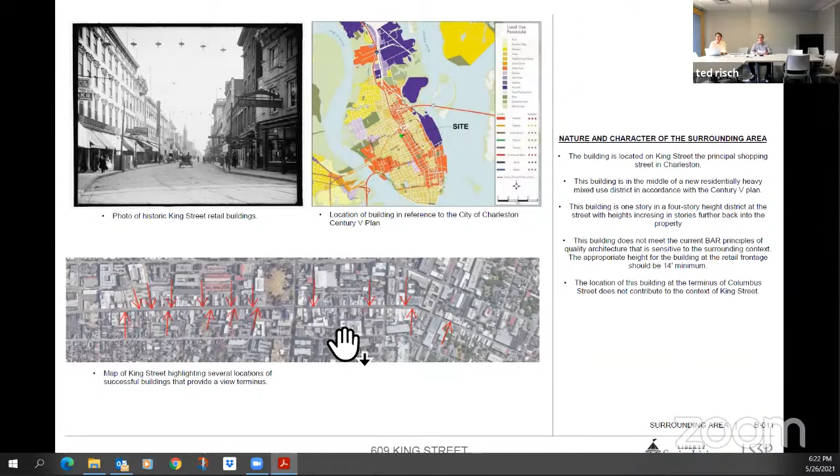If you consider the map on the bottom, it tries to indicate that the criteria of nature and character of the surrounding area is really quite important. A building here may not be as important as a building there because of its juxtaposition with the terminus of a street that dead-ends into it. We all know the great examples in the city, and these are a few that occur on King.

If you consider the site at the intersection of Columbus and King, this is a principal location in the Upper Peninsula, and it's an opportunity for greatness. Looking at this map of Charleston, you can see how few opportunities there are where we can put a promising building capable of defining a district.

This area of Charleston has largely changed since the 50s, when the printing plant was built across the street, and U-Haul, all of our favorite buildings, were built in the 50s. It's hoped that what will happen in this district will be a transformation into a mid-rise mixed-use district whose charge is to increase density and put more people in closer proximity to where they can live, work, and shop.

And you can see from the projects that have happened in the last few years, and what is to come, that this building on this site is really going to arguably be the center of this new district.

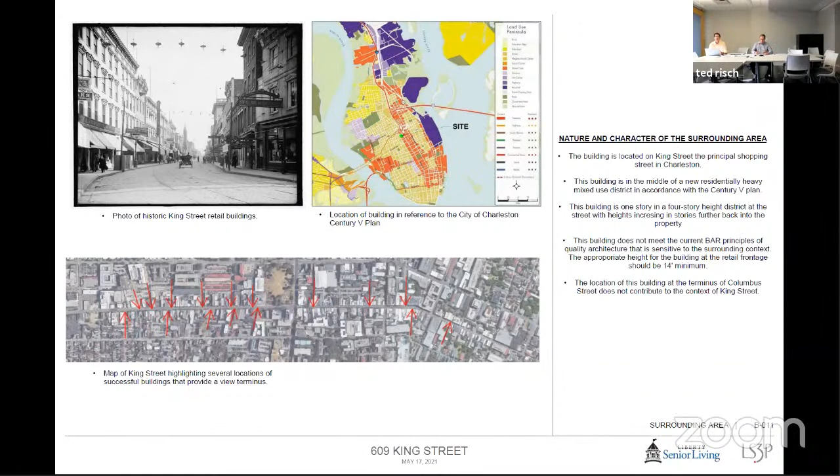In our historic report, we pegged the building in the late 20s due to research our historical consultant did with the city directories and the business name changing that went on. We understand that there may be different situations. We did a research pass since we've submitted this application.

We find that the principal uses in the building after '36 were restaurants, loan companies, men's clothes, laundry, barber shop, market grocer, drugstore, and electrical repair. Basically neighborhood retail. It served its purpose for many years, a long, useful life.

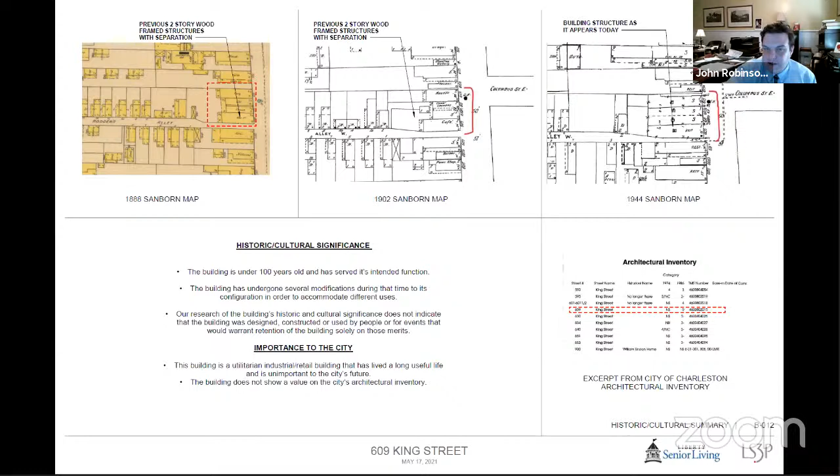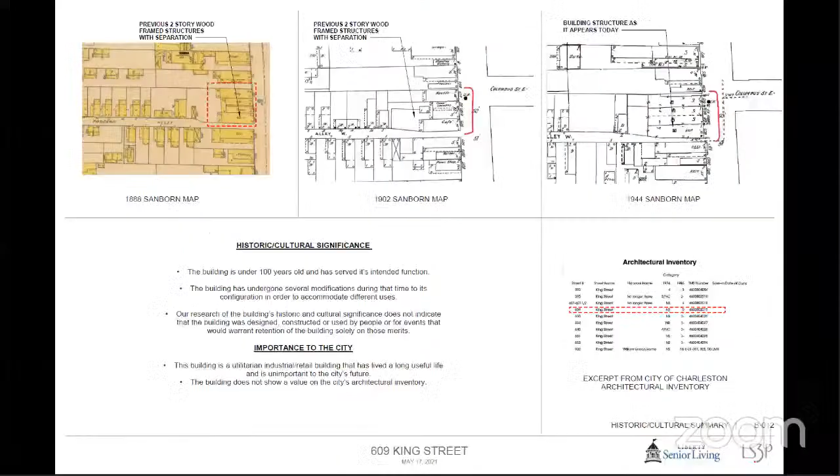Erin Minnigan with the Preservation Society of Charleston. The Preservation Society appreciates the applicant providing background on the demolition request, as well as the opportunity to visit the site to more closely inspect the building yesterday. We are concerned by this demolition request and feel more information is warranted for the board's consideration.

First, the historic report provided with the application lacks details on the building's cultural history and contains inaccurate information. As evidenced by articles in the News and Courier, the building was constructed in 1937 in the Art Deco style characteristic of the time. This area of Charleston was an important center for African American and immigrant communities in the 19th and early 20th centuries. According to recent research conducted in the city directories and Sanborn maps, this block alone once housed nearly 30 storefronts, primarily occupied by Jewish, Greek, and Black merchants.

In fact, the State Historic Preservation Office recently gave a determination that this upper area of King Street is eligible for listing as a National Register Historic District, given its history as a thriving commercial corridor of Jewish and immigrant enterprise from the late 19th to mid 20th century.

And this building would likely be a contributing resource to that district, pending further investigation. As a result, we feel more research and documentation must be done on the specific historic uses and tenants to better understand the building's cultural significance.

Furthermore, this building is one of the few remaining examples of Art Deco architecture in Charleston, and notably the last remaining historic building fronting King Street from Spring Street to Line Street, which we feel are important factors to weigh in considering its preservation.

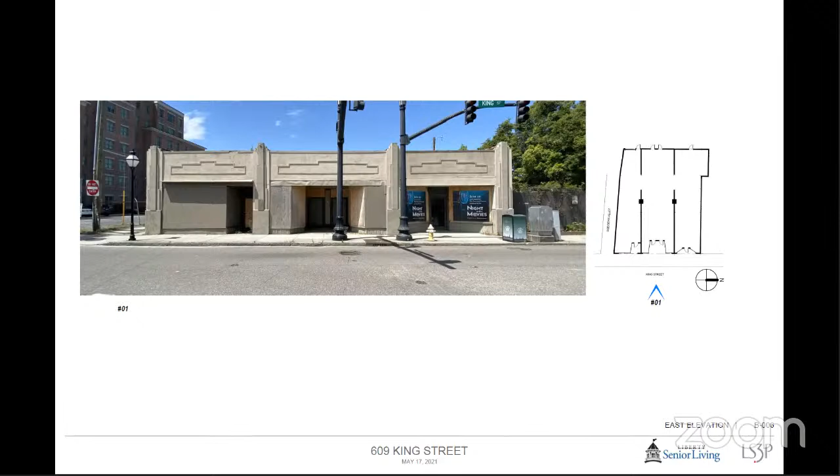Again, while we understand the desire for a developer to work with a blank slate and the difficulties of incorporating a single-story historic structure into a site plan of a 6-story zoning district, we do not find sufficient evidence to justify the demolition of this notable and rare example of vernacular Art Deco architecture. The applicants should restudy their plans and figure out a way to incorporate this historic structure into the programming of the development. Successful attempts to preserve historic structures with new developments have been done very recently, of which 511 Meeting Street is a great example, as noted previously. We recommend denial of this request for demolition of 609 King Street.

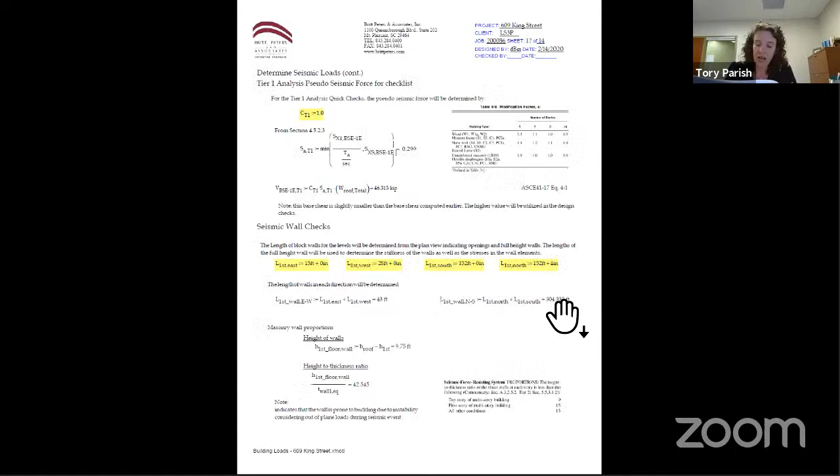Staff observations are that no one enjoys reviewing a demolition request, especially for a building that seems intact and salvageable. This has been a tough decision for staff, and we acknowledge it may be a tough decision for the board as well.

In reviewing an application for demolition, we reference Ordinance Section 54-240, Article B, which states that in reviewing an application to demolish, demolish in part, remove, or alter the exterior architectural appearance of any existing structure, the Board of Architectural Review shall consider, among other things, the historic, architectural, and aesthetic features of such structure, the nature and character of the surrounding area, the historic or culturally important use of such structure, and the importance to the city. As a point of reference, historically the board has voted to incorporate historic properties or parts thereof into the forthcoming larger project.

Regarding the historic, architectural, and aesthetic features of the structure: the building is characterized with an Art Deco theme. This theme is represented as a front facade treatment only and is simple in nature. There are more refined examples within the city, and it is unclear how much of the treatment is original versus added as part of a later alteration.

Regarding the nature and character of the surrounding area: the existing building is a single-story structure in an area of multi-story buildings, and therefore no longer represents the greater context. Its size and scale are out of character for this portion of King Street.

Regarding any historic or culturally important use of this structure: research within the historical report presented by the applicant indicates the businesses that occupied the building seem indicative of King Street businesses throughout the years. There is little information presented or uncovered at this time that clearly illustrates any important cultural significance. The building is believed to have been designed by Charleston architect Stephen Thomas, yet his designs were typically colonial revivals. Additional research is needed to determine what, if any, cultural significance this building represents.